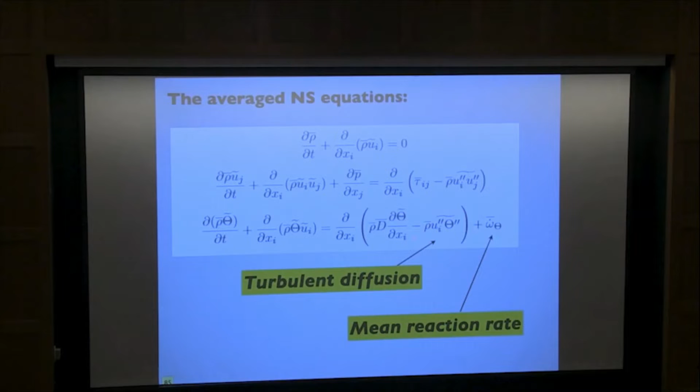I have shown you how to build a very, very bad model, but this is the only one we have for this diffusion term, where we replaced it by an expression which uses the gradient of the mean progress variable, so that we could replace this term directly in the equations. So this term that we don't know, we replace as a function of the gradient of theta.

Someone asked me if there was proof that this works. They actually proved that it does not work in many cases. This term, linking the flux to the gradient of theta, is one you might want to remember. We know there are cases where even the sign is wrong. That's what we call counter-gradient diffusion. When turbulence is not very intense, a model like this will produce a result with the wrong sign. We're not even talking about magnitude. The sign is wrong.

But still, everyone's using it. No one in the community, well, maybe 0.1% of the papers, tries to do something else. So we're all using this model. There are good reasons for that, but I don't want to go into the details right now. Let's say this is a Darwinian process, the only model used today. Now I want to talk about the second one.

The second one is an average needed for this quantity, the instantaneous reaction rate of a flame, and now we need to average it or filter it. You might think that shouldn't be too difficult, but this has kept us busy for a long, long time. Let me show you where the problem is. This is the expression of the reaction rate as a function of temperature, and it is very nonlinear. So when you want to average it, that will lead to problems.

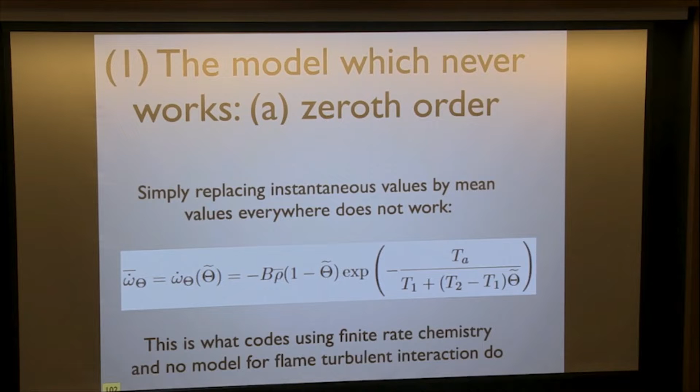This model doesn't work, and I want you to realize why. It's basically trying to ignore that we don't have the resolution in LES or RANS to capture a flame. A flame is typically 0.1 millimeter, while our mesh is at least 1 millimeter, maybe 0.5. So we are far, far from that. If you look at the field of averaged quantities, you have one cell at 0, one cell where you have the flame, so C might be 0.4, and one cell at 1. So obviously, if you try to apply an Arrhenius scheme on that, you will get 0, something, and 0.

You are not going to propagate any flame with that, okay? There's just no way. So we could use a model like that if we would not average, but not if we average.

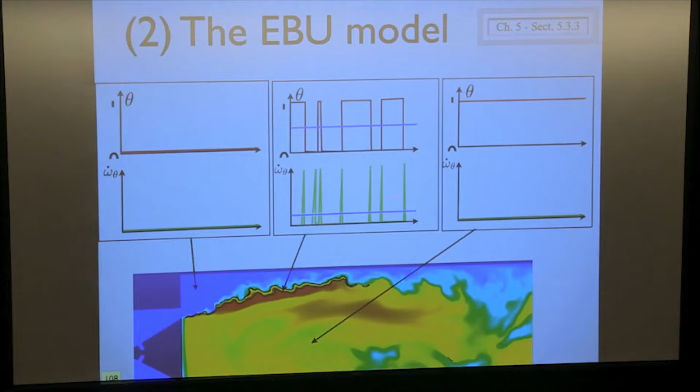So Spalding said, okay, let's build a model which takes that into account. For the moment, forget about chemistry - let's just count how many times a flamelet crosses a given location. So this is proportional to the variance of the temperature. Why is it proportional to the variance? Well, the variance is 0 if theta is constant, and if theta starts oscillating, the variance goes up. So it's a good model because it's at least not 0 where it shouldn't be.

And then it's exactly like the diffusion model. You say, okay, this is a term, I need to have the right dimensions, so I need a time here, and here I need a density, and here I need a constant - because I know that this constant is not going to be constant, but so I can tune it.

Now, the eddy breakup time, which is at the denominator, is the time of the turbulence. When you see that a flame passes in front of you, it's probably because it's carried by vortices. What is the typical time of these vortices? It's the only time you have - it's K over epsilon, K is the kinetic energy, epsilon the dissipation. So if you have a K-epsilon model, you have this quantity, so you put it here.

Now, unfortunately, you still don't have the variance of temperature. But again, you go back to the old guys - Bray, Moss, and Libby - and they tell you that if the flame is very thin, you can prove easily that the variance of temperature is just equal to the temperature multiplied by 1 minus the temperature.

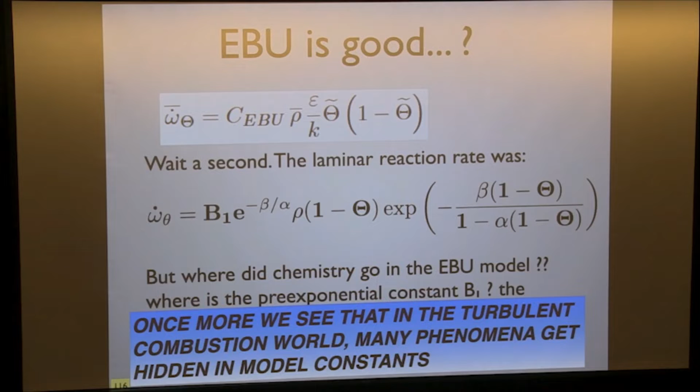If you know the answer, it's an easy model to use. If you don't know the answer, it's tough. So the Eddy breakup model contains everything which you had to throw away to be able to build a model which works. And again, I told you already, in the combustion world, you don't want to be a perfectionist, and you have many constants which are actually not constants, but that's the only way to make this thing go.

So at this point, I would like to open a small parenthesis on what we call the ultimate model. There is a model which would work all the time, and that's the PDF model - the probability density functions.

I just want to remind you of what this thing is by taking a simpler example that we can do right here in this class. We could take this person and ask him what's his size, and then we would put a +1 at his size. Then we'll take his neighbor, and we'll do that, and we can build a histogram of the sizes of the people in this room.

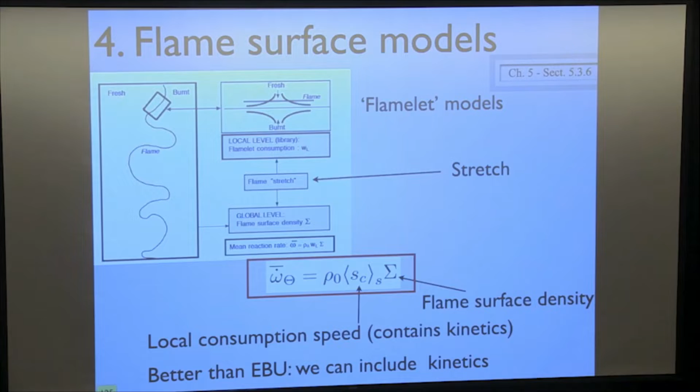It works only if you're in a flamelet zone. If we go back here to the diagrams of premixed combustion, the main problem is to find the consumption speed and to find the flame surface. Consumption speed, in many cases, we end up saying it is the laminar flame speed. I'll talk about hydrogen Friday. You will see there are exceptions. But for most fuels, when you average the consumption speed along the flame here, you find it's very close to what Darrieus and Landau said, close to the laminar flame speed.

So the main problem is to find the flame surface density. Because the flame surface density is created by turbulence, by a lot of things, and this is where things get difficult. And so there's been quite a few people who work on that. I think Pope, and we did also quite a few things on that.

Writing an equation for flame surface density is a pain. Let me show you how these things look—they are quite unpleasant. This is the equation for sigma. It has all kinds of terms. One of them you will recognize.

It's the stretch that we discussed yesterday, that Moshe discussed this morning. This is the source term of flame surface. If you stretch the flame, you create flame surface, by definition. But at the same time, you transport the flame surface to another place, and the flame moves itself and changes that.

And then, of course, you can have sink terms. You don't always create flame surface. Sometimes, if two flames meet each other, you make some flame surface disappear. So you need to model all that, and there's a long, long story of modeling.

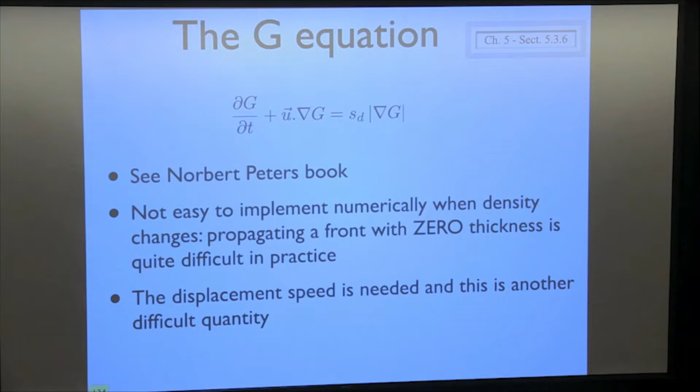Again, if you look at the history of turbulent combustion, there has been cycles. There was a cycle with PDFs, there was a cycle with the G equation. The reference here is Norbert Peters' book. But in practice, numerically, it's quite difficult to use.

Now, I mentioned yesterday the Thickened Flame model for laminar flames. It's probably one of the most used models today because it allows you to incorporate chemistry directly. So the way it's done: you start from this equation, which is the true equation, and you multiply diffusivity by F, and you divide the reaction rate by F. You can still keep 10 species or 20 species if you want.

The nice thing about it is that now the flame thickness is larger by a factor of F, and you can actually resolve the flame fronts much more easily. Instead of having 2 points in the flame zone, now you can have 20 or 40 or 100, depending on how much you can afford in terms of grid. If you are poor, you use a large value of F. If you get richer, you can decrease F and get more precise. But at least your code can work. And so this is why so many people use it at the moment.

Now, of course, there is a price to pay for that. It's clear that you cannot thicken the flame front and not lose something. If you propagate a flame which is 1 centimeter thick instead of 1 millimeter, something must happen somewhere. So you have to correct for that.

And the way you correct is that you have to introduce what we call an efficiency function, and we measure it usually by doing DNS. So here's an example of a flame which is not thickened, F equal 1, and the same here with F equal 5. You see that when F equal 5, there is much less surface, because it's difficult to wrinkle something which is big—the vortices cannot go into the flame, and you cannot curve something which is big here.

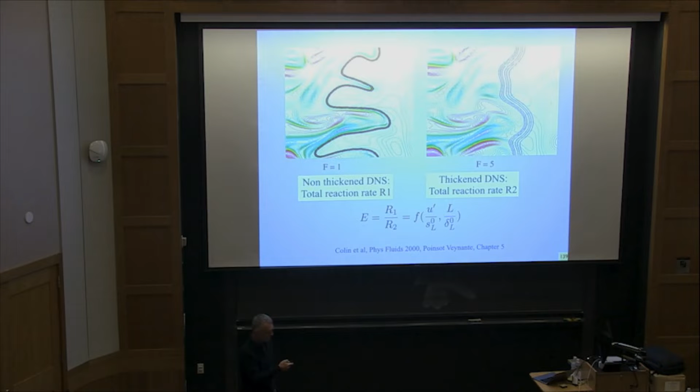So, for example, you see these points here have completely disappeared when you thicken the flame front. So what do you do? You measure the difference between the two here, and you multiply—in the initial equations, let me show you... did I write it down? No, it's not there. Let me go back here. You multiply here

the reaction rate by E so that you can make the flame faster. In other words, it has less surface, but you have sped it up so that it is actually burning at the same speed as the initial one.

And of course, E now becomes the place where you put all your modeling. This is what's done today by a very large number of people, one reason being that when you do that, you can still do complex chemistry if you want.

Let me finish with something I decided to talk about because I'm sure the question will come up, which is deep learning. At the moment, if you read Combustion and Flame, you will see deep learning everywhere. I just wanted to talk about that a little bit.

The world of mathematics has traditionally been split in two: models and data. Models means you look at a pendulum and try to write the Newton, or Navier-Stokes, equations to predict the frequency. Data means you look at 2,000 pendulums and make a table to recognize that for a given length, the frequency will be that much. In other words, when you do data, you don't try to understand the physics behind it, you just want to mimic it.

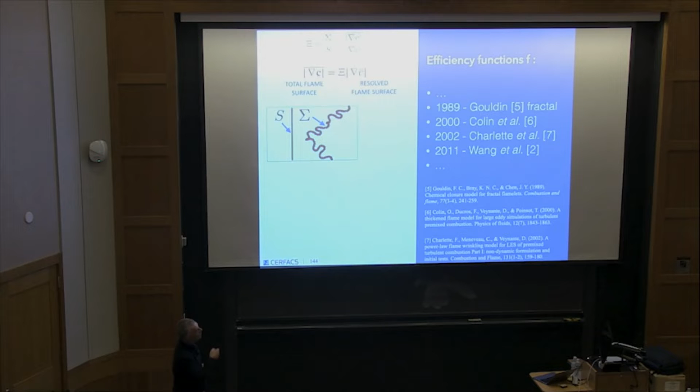If it's a flat flame, you will find 1. And if it's a corrugated flame, you will find the flame surface. So we'll talk about the surface, and we will measure the surface by the gradient of C. So the average of the gradient of C is the truth, and the gradient of C average is what the LES model will see. I just want to show you how you can do that using a CNN.

The role of the CNN is that I give it an LES grid and ask it, what is the subgrid scale wrinkling? Can you tell me? Of course, the CNN has no idea—you have to teach it how to do that. How do you do that?

Well, usually in fluid mechanics, you provide a DNS on which the CNN can learn what's going on. So here you see a typical DNS—this is the Bunsen burner. You inject turbulence, the flame front is here, and this DNS is very well resolved. On this DNS, we know everything.

So this is an example of the animation. You see the fresh gases, the burnt gases, and we can measure the flame surface here as much as we want.

So I'm going to show you how we train. This is the usual procedure with a CNN, okay? You have a training phase where you teach it what to do, then a testing phase where you verify it's doing what it should, and then you can apply it in another code.

So we have what we call the a priori test. Those are cases where you just test if the model does what it should on one snapshot, for example. And then we do a posteriori test, meaning you take your code, plug the model into it, and run a long simulation to see if it's doing what you expect.

I'm not going to give you the details of the CNN methodology, okay? It's not a school on AI. I just want you to understand how it works.

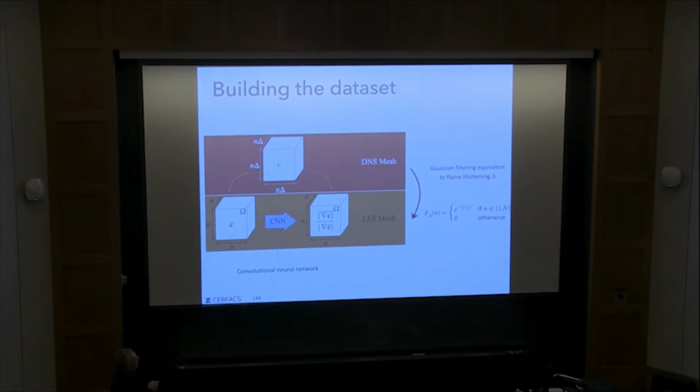Now the CNN must tell you how much wrinkling there is. To do that, you give it the true answer from the DNS, so that every time it sees this picture, it also sees this one. After a while, it must be able to predict that without seeing this. Once it's trained, once it has learned how much wrinkling there is, it should be able to give you the information right away. Well, right away takes a long time, huh? So let me show you how this works.

You have this training phase here, so we give the fully resolved DNS, and this is the average result. You see that this field has been averaged. So this is the field that will be resolved in our code, and this is the subgrid scale wrinkling.

The subgrid scale wrinkling is obtained from the DNS, because here, when we take a box, we can look inside and measure the flame surface, and we plot it here. So for example, you see that this point of high flame surface is this zone here, because there is a high surface.

And so we give millions of these snapshots to the CNN, literally millions, because we run the code many times, and every time it sees that, it learns, so that after a while it's able to give us the wrinkling from the mean field without seeing anything here, because it has already learned. So it knows if it sees a field like this with this type of shape, the wrinkling must be like that.

A very important thing about CNN, which is nice actually, is that when it does that, it doesn't look locally at the value of C like what we do in a model. In most models for turbulent combustion, we look only at one point. The CNN doesn't do that. It looks at the whole field in one shot. So it knows that to find the wrinkling here, it has to look at the whole field of C. Somehow it guesses the 3D shape.

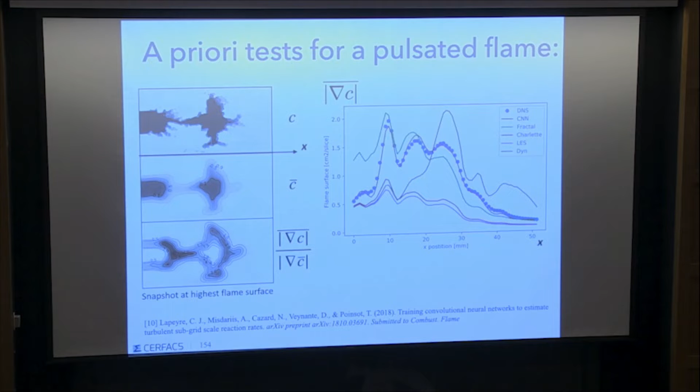And then you can also go one more way and say, okay, let's run now directly the CNN model in the code. Instead of running a turbulent combustion model, we can directly run the CNN.

Now just a word about that. If you want to use AI in a CFD code today, you better stop CFD and start computer science, because everything which is neural network lives on GPUs, and everything which is CFD, well not everything, most of it, lives on CPUs. If you want to run a CNN in your code, you need to couple GPUs and CPUs, which is what we did, but not me. It's a pain. You need to find a machine on which you constantly exchange information. You send the average temperature to the CNN, and the CNN sends you back the wrinkling. That's easy to say, but to make it efficient is really painful.

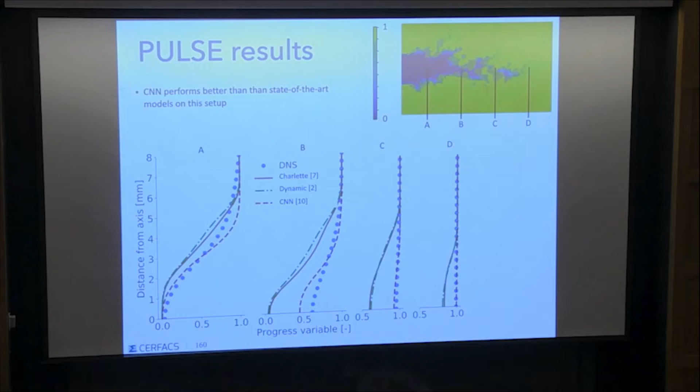So when you do that, you can do, for example, a flame like this one, where you pulsate the inlet. This is what the DNS gives, this is what the classical model gives, and this is what the CNN gives. And when you compare, we can actually prove that the CNN is doing better. When you look at the statistics, the CNN is doing better than the other models. So you might say, okay, great, so it works.

Actually, let me jump that. Actually it may work, but what happened after this talk - this was done a year ago - we used the same CNN on a completely different configuration, and it was completely way out. That's where we hit the main problem of neural networks: they are pretty good in the configuration where you teach them, and not pretty good when you change configuration, because they have learned something specific and have no way to extend it. They know how to interpolate, they don't know how to extrapolate.

And so the answer of the CNN guys at my lab was to say, oh well, you just have to learn on the new configuration. I say, okay, I have to learn on every configuration, so that's not a model. In other words, if you do DNS of every configuration, then you can do a turbulent combustion model. But if I have a DNS of everything, I don't need a model. So I think at the moment the big problem with CNN is that when you do it on one configuration, you are not sure it will work on another one.

Unlike theory, when you build a theory for a model, you know how it works, which is actually the other problem of CNN. Since we don't know how they work, they raise a big problem for industry, because if you want to certify anything using a CNN or AI in general, since you don't know how it works, you don't know if it can fail. So people are not so happy about that. I know you will find a lot of papers, a lot of contracts today on neural networks, but be careful, it is not that simple. It's a complicated story.

Let me see, yeah, we have time to start discussing the next topics, and maybe we'll come back for questions after this talk. Since many of you are actually doing CFD, and for the others who don't do CFD but would like to be able to criticize their colleagues, I'd like to spend now maybe half an hour or a little bit more on CFD specifically.

You know that one of the problems of CFD is that either you believe in it or you don't believe in it, but there are places where CFD has been used so badly that people don't even want to use it. For example, in France, you cannot predict the safety of industrial systems using CFD. They won't listen to you because they know it's not working, well, at least that's their conclusion.

At the same time, we see that more and more people expect much more from CFD. They expect CFD to predict the noise. They expect CFD to do ignition, quenching, instabilities, a lot of other things. So one of the problems we have now is not only do we need to do better models, but as you will see, we need to go to large eddy simulation, which means we need to change the code. Because it's not sufficient to put a model in a code to do LES. You need a good code to do that.

Okay, so I'm going to remind you why we want to do LES or DNS, then tell you what is needed in terms of physics, and then in terms of numerical methods. We talk only about turbulent codes, 3D turbulent simulations. I'm not talking about Cantera or Chemkin. Those things are easy. The main difficulty is to do something in 3D with turbulent flames.

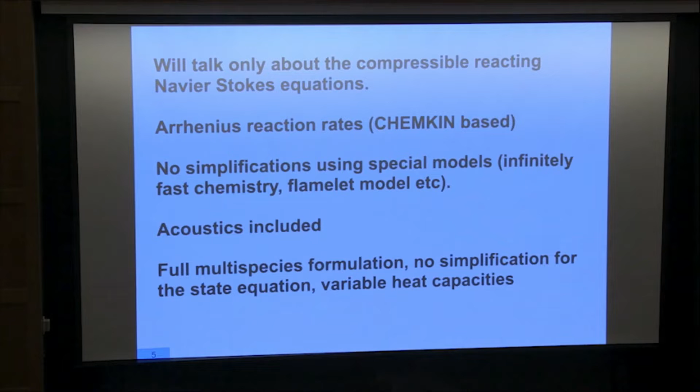We'll talk only about the full compressible equations, but everything I'm going to say could be used for simpler formulations, like low Mach number. So there will be acoustics, and I will need to talk a little bit about acoustics to get you ready for tomorrow. I don't know how many of you have studied acoustics. Who has already had a course on acoustics? Okay, not so bad. Sorry for the others, you will have to learn a little bit about acoustics.

So we have shown the equations. I just want to remind you that we're going to solve all these equations - energy, species. We have all the terms for that. And the main problem is that we need to do that in a turbulent flow, where we don't have enough points to do all that with precision.

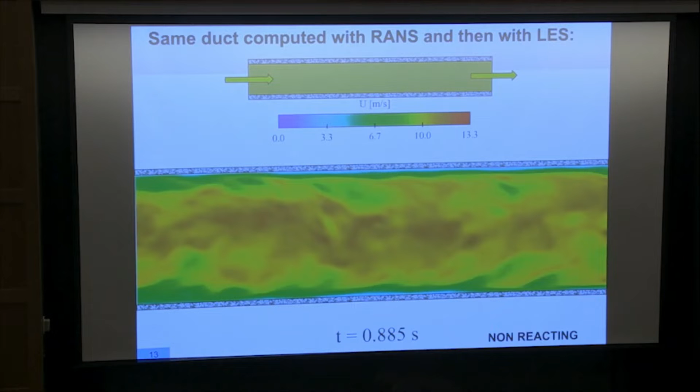The important thing when we move to this kind of simulation is that in terms of needs, it's really not the same. If you do RANS, this is the result of the RANS computation. You don't need a lot of points. Look at the gradients here - there is no gradient in this direction, so you don't need points. And in this direction, if you put maybe 20 points, you're good. So with 40 points in 2D, you could compute this flow.

So that's cheap, that's why it goes so well and so fast. But if you do LES, it's not the same now. You have to resolve the unsteady structures, which can be pretty small, and they can go in any direction. So you need to put a grid which is regular and small enough to capture all the details. And that's going to be already hundreds of thousands of points. So this is why the price is going to increase. And then, of course, you have to do it over time - it's going to be hundreds of thousands of iterations. So right away, you understand why the cost will be much more.

The other thing also which is not so nice about RANS is that RANS is actually hiding what's going on.

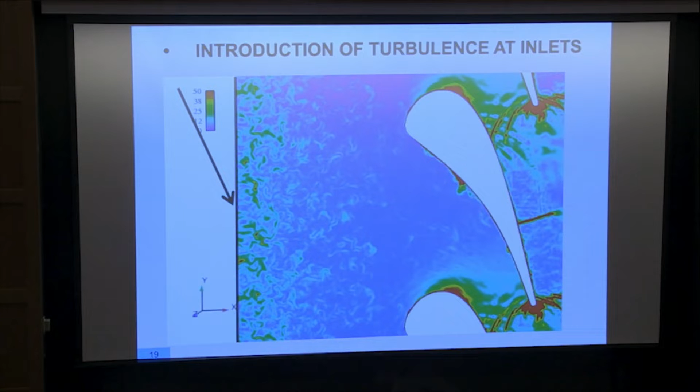For example, if you do a simulation of a blade with LES, you need to introduce turbulence at the inlet by resolving it. That means you need to create a turbulent field, which is a funny business that's going to use a lot of PhDs, actually. This is another example that makes very nice pictures.

We introduce turbulence here on the left, and you need methods to do that. Here we're looking at the vorticity, and the results will be completely controlled by the quality of the turbulence that you inject here. So you'd better do a good job injecting turbulence, which, by the way, leads you to the question of what is turbulence again, and that's a tough one.

So how do you do that? You need two things in a code to inject turbulence. You need to know the signals you want to inject, U, V, W as a function of time, okay? And those are imposed using a spectrum usually, a turbulent spectrum.

But then there's a numerical problem. You need to work on boundary conditions, and boundary conditions become complicated. Normally in a boundary condition you say U equal 10 meters per second. That's over now. Now you need to specify at each point an unsteady signal matching your turbulence conditions, and that's a big job.

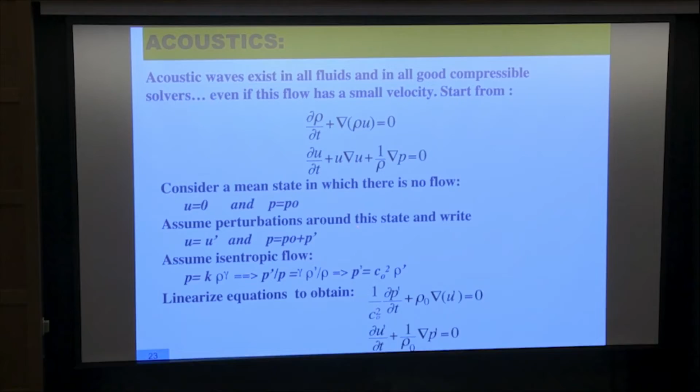If I suppose that P prime over P0 is small and U prime over the sound speed is small, I can plug that in here. I can also suppose, with good accuracy, that those perturbations are isentropic. Remember isentropy says that P is proportional to rho to the power gamma, which means P prime over P is gamma rho prime over rho. And this thing here, gamma P over rho, is nothing else than the sound speed squared, so the perturbation of pressure in this room will be connected to a perturbation of density with the sound speed squared in the middle.

So you plug that into this equation and you find what we call the linearized Euler equations, which are the baseline equations to do acoustics. These equations show you how to compute the propagation of a pressure perturbation or a velocity perturbation, exactly like those equations drive the propagation of sound here in this room when I'm talking.

So you can combine these two equations to obtain what we call the famous wave equation, and I've written this wave equation here in 1D. You see it's the second derivative of P prime versus T, versus second derivative versus X, with 1 over C squared in front of it. This equation has a very simple solution - well, two solutions actually. One solution is a wave traveling right.

So when I'm talking to you, sound's going that way. But there's also the same thing when traveling left, just by having U prime and P prime in a ratio of rho C with a minus, you go left. If you put P prime equal rho C U prime with a plus, you go right.

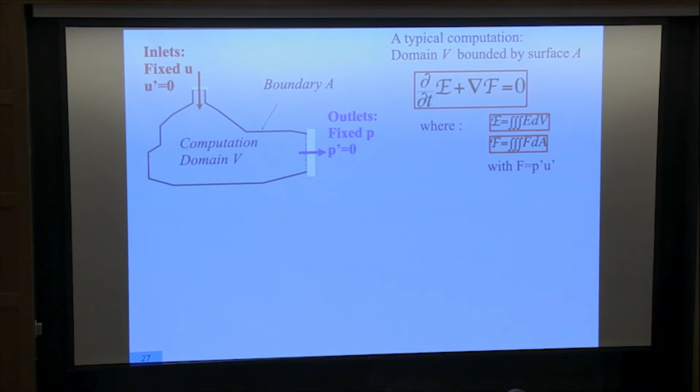Since the fluxes are 0, it means the first term here must be 0. So dE/dt is 0, E is constant. So the acoustic energy which is in your box can never go away. So I've just demonstrated that in a compressible code you can never converge, because with these boundary conditions, the acoustic energy present at the initial time will keep bouncing all over the place so that you will never reach steady state.

And you will tell me that in Fluent that's not the case. We'll explain in a few minutes why.

In a code there are two things I've neglected. One is the viscous dissipation in my demonstration. If I had kept viscosity, I would have had a small term here, mu multiplied by some term. But in an LES code or in a RANS code, you get much more problematic terms: the turbulent viscosity and the artificial viscosity. These terms would kill the acoustic energy and bring the code to convergence, but for the wrong reason.

And in an LES code, we don't want to do that. We want to keep the acoustic energy where it should be.

In other words, in the real world the energy is dissipated because there is a flux. How do we know there is a flux in a combustion chamber? Just because if you're sitting outside, you can hear it. Obviously, if there were no flux, you wouldn't hear anything. So that means when we say U prime equals 0 or P prime equals 0, this is not sufficient. We need to do better than that.

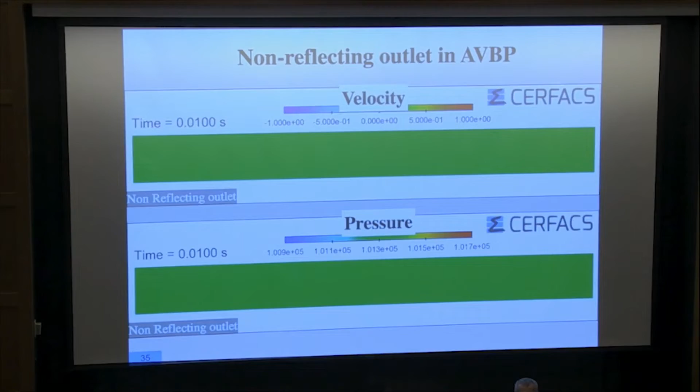No one really cares. Write papers on the methods which allowed you to get the results, because those papers are cited, they're useful for readers. When you write a big paper saying 'I did this wonderful computation,' people say, yeah, why do I care? But if you tell them how to do the same thing, they are more interested. That's a key element if you want to do LES. You need these boundary conditions.

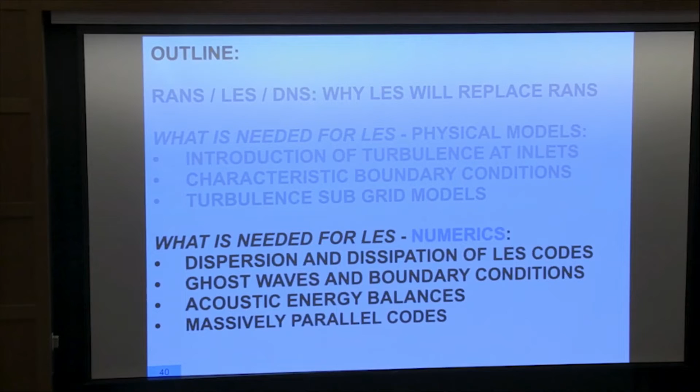I suspect many of you have already followed a course on numerical methods, so I'll try to keep it short, but there are a few things you really need to understand if you want to do CFD and LES, and also if you want to understand what the limits are when you look at the results of your colleagues and they tell you, I've computed it, so it's right. I guess in many cases, I've computed it, so it's not right.

So to do that, I need to start discussing the numerical methods and to talk about waves. It's another field probably that not all of you have touched yet, but you've seen acoustics, which are actually waves. But you have other waves in fluid mechanics. You can have entropy waves if you have a hot spot propagating in a flow, a zone of high temperature. You can have vorticity waves.

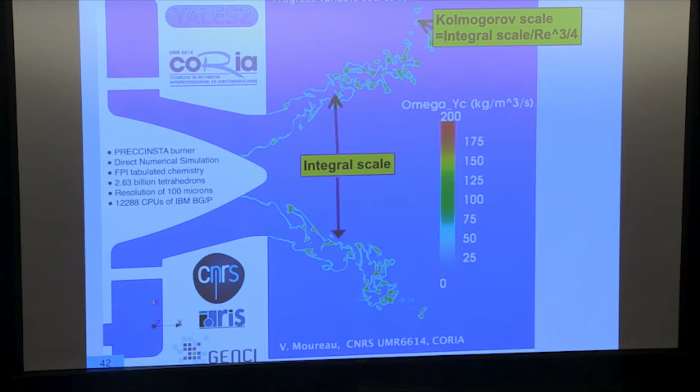And so you need more and more points. And the number of points increases like Reynolds to the 3/4 to the power 3, because you get 3 directions. So it's like Reynolds to 2 point something. So when you go from Reynolds equal 1,000 to 5,000, it's not a detail, even so you don't see it.

So really, the problem when we do simulations, and when you talk to your PhD colleague telling you, I'm doing all this wonderful LES of my chambers, what is your Reynolds number? If the Reynolds number is high, then probably you're not doing what you should.

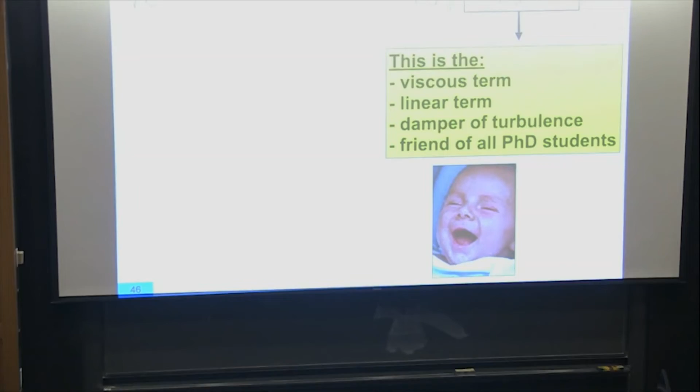Some of you may not be used to the Navier-Stokes equation, you're just coding them, but you have to get into them to understand what's going on. That's the momentum equation. This term here is your friend. It's the viscous term. It's the term which prevents eddies from becoming too small, because if viscosity is large, when you have a big vortex, it will go away. This term is useful for us because it's also a linear term. If you multiply the velocities by 2, you multiply this term by 2.

Great. Now, the problem is that this term has to fight the guy on the other side here. This guy is not your friend. Why not? Because it's a product. Forget rho for the moment. There's a product here, ui, uj, which is a nonlinear term. I don't know how many people here have studied chaos, but you know that linear equations don't do anything to you. But if you take any equation like y prime equals 2y squared minus y cubed, this thing can get crazy because it leads to chaos.

Chaos leads to turbulence, and so in this equation, you have to understand that turbulence comes from this guy. If this term would not be there, you would not have to care about turbulence. Everything would be linear, like people solving the heat equation, dT/dt equals alpha Laplacian of T. That's great, no turbulence, okay? But for the flow, this guy hates you. And the way it works is that this guy creates the turbulence, and this guy dissipates it.

And the ratio between the two is the Reynolds number. So when the Reynolds number is large, you have a lot of people who are not really friendly, and just one guy trying to help you by dissipating the energy. And so this is a tough fight. So how do you handle that in practice?

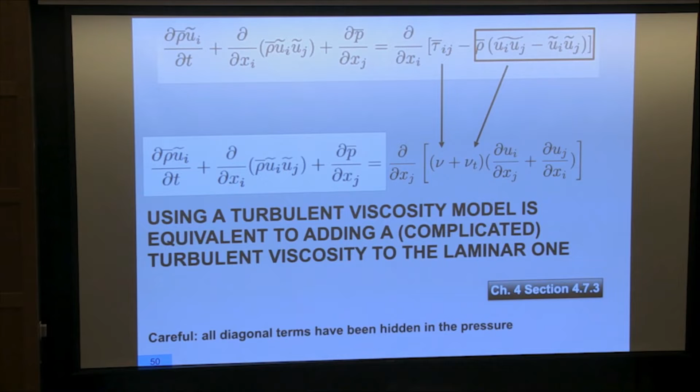The other solution is, if you look at basic courses on numerical methods, you know that if you're trying to solve this equation, which is really the baseline equation for waves—an equation where you propagate a signal f at speed u—if you discretize it this way, with a centered derivative, this thing blows up right away. It's unstable. If you remember your courses, this thing is unconditionally unstable. And so the way people fix this problem is that they add a second order term on the right-hand side of the equation, which is fi+1 plus fi-1 minus 2fi, divided by delta x squared, and that fixes the problem. If you take a nu here that's not too big, you're able to make this equation stable.

Except that, of course, you're not solving this equation anymore, you're solving that one, because this expression here is just a discretization of that one. And so now we have added another viscosity—in addition to the turbulent viscosity, we have added an artificial viscosity to our problem.

Now, by the way, many of you are using codes where people say they are not using artificial viscosity because they have upwind schemes. Upwind schemes are a way to stabilize schemes where, instead of Fi plus 1, you put Fi minus 1 when U is positive, and that fixes the problem. But again, if you do the Taylor analysis of that, you find out that you have just added a second order term.

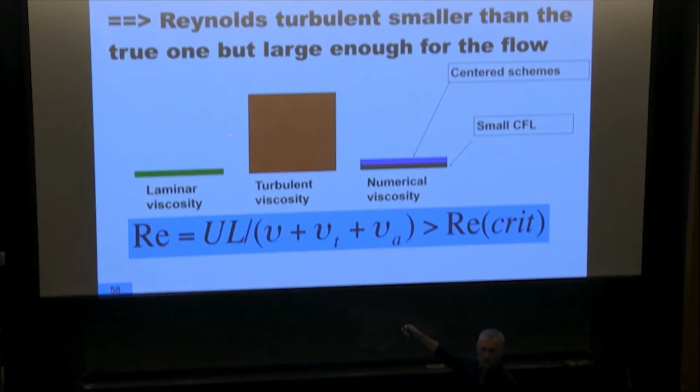To do something in between, we want to diminish the turbulent viscosity by using subgrid scale models such as Smagorinsky, so we have less viscosity so that the flow can be turbulent at least. The trick is that when you decrease this, the numerical scheme's dissipation should also be decreased, otherwise you have a problem. A good LES code should not use upwind schemes and should use a small time step so that the Reynolds number stays as large as possible.

This is where things get difficult. For example, Fluent and many other codes, Converge, all these guys, they've done the same thing: they took their code and just replaced the K-epsilon model with a Smagorinsky model, but didn't change the numerics. So when you run these codes for LES, the subgrid model doesn't play any role. Everything is controlled by the numerical terms, so when you change the grid, you get a different result. The way to check is: if you run those codes, you can go into the code and set nu_t to 0, and you'll find the same result, because it doesn't play a role. Everything is in the numerical terms.

So again, one of you asked me if I believed in CFD. I believe in good CFD, okay? But not that — this is controlled completely by artificial viscosity.

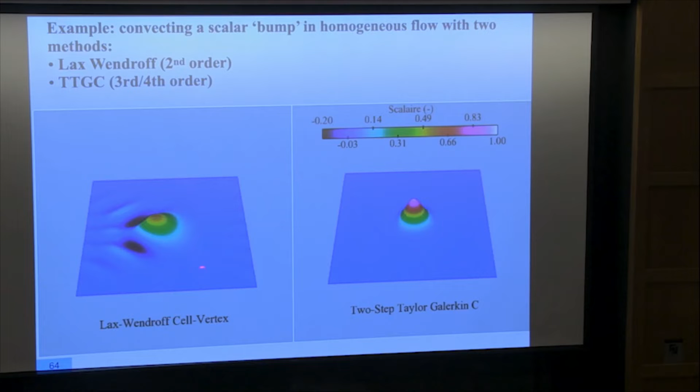There's another reason why you want to do this. This is a species, okay? The nice thing about dispersion is that it can create strange behaviors, like those zones here that are negative. Dispersion does that. When you start from a signal like this, and if the scheme is dispersive, you start having wiggles, and the wiggles can become negative. Negative for a species is a little bit of a problem, okay?

If you have a chemical scheme, imagine if you say the concentration of O2 is minus something, the chemical scheme will not like it. So this will lead to problems, which sometimes people eliminate by saying yk equals max of yk and 0. That's called clipping. If it's negative, I put it to 0, but that does not conserve mass, and you don't want to do that.

I'm not going to give you a long list of all the possibilities, because there are things you can do to understand that just by hand. Again, theory - not theory of combustion, theory of numerical methods. You can study the properties of schemes without having to write a code, just by looking at this equation.

So this is the propagation at sound speed c of a signal u. It could also be propagation of temperature at the convection velocity. It's the same. So it's just to show you how a scheme like this reacts when you change the time advancement scheme and the space advancement scheme. We're going to do that with the simplest scheme to derive in space, which is ui plus 1 minus ui minus 1 divided by 2 delta x.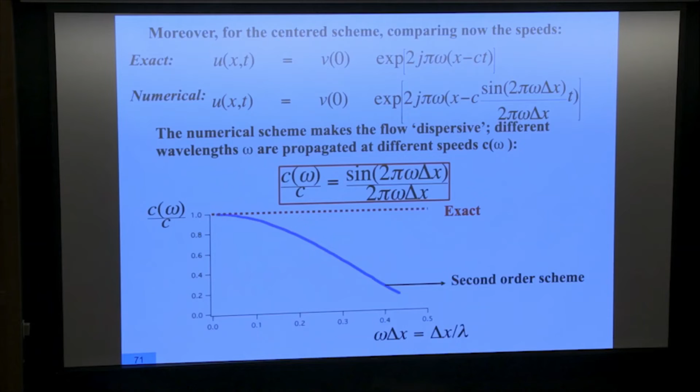So now you see that the speed at which my code will propagate the signal compared to the true speed is given by this expression. You can plot it as a function of 1 over omega delta x, which is also the wavelength divided by delta x, which is nothing else than the number of points you can afford to put in your vortex or in your acoustic wave.

You see here, for example, if you put 10 points in this vortex, you will have an error of maybe 5%, which is already big. But if you are poor and have only 4 points in your vortex, you have an error of 40%. So if you're doing LES of combustion in a chamber and your vortex propagates with an error of 40%, you might as well not bother, because it's going to be wrong.

So all the frequencies will be wrong. I mean, it won't work. So we need to improve on that. And how do you do that?

Well, it's been known in the DNS community for a long time that when you go to high order, it's much better. I've seen someone yesterday using the 6th order scheme that we developed at CTR a long time ago. A 6th order scheme is much more precise. A spectral method would almost be on the exact line. So you definitely need high order schemes if you want to do this job.

So let me show you what that gives if you write a code. This is a MATLAB code, and you try to propagate one of these signals. So I've decided to take this shape, and I'm going to advance it in time. I just want you to look at the results.

So the cyan color is the exact solution, and the black is the numerical solution. Normally, they should match at all times. The system is periodic, so when the wave comes here, it will come back on the other side. So look at what's happening.

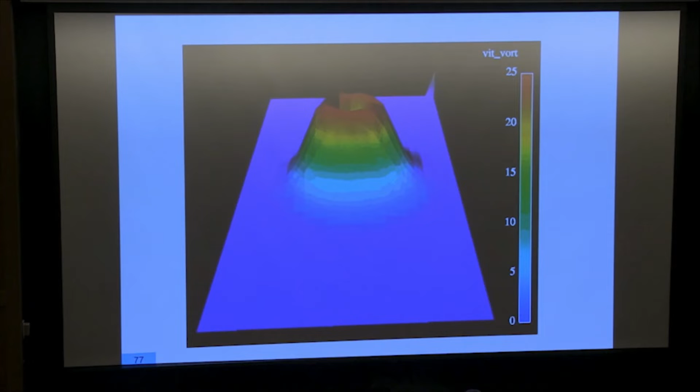So here now you have a vortex in a periodic box. The vortex comes out and comes back. It's non-viscous, so the vortex should come back exactly the way it left. This is a view of the vorticity - you see the vortex leaving, coming back. We can make it turn 1 time, 2 times, 10 times, and it should remain the same. Again, no dissipation - we don't want this thing to go away.

I'm going to show you results obtained with - actually we did it with CFX, we did it with Fluent, we did it with our code, 2nd order, and then we did it with a 3rd order scheme. I just want you to look at the results for the moment. For the moment, we're going to do it also with a small CFL number.

That means a small time step, if you want. If you want to repeat those tests, you can go to this e-learning website at CERFACS, and there's a long list of descriptions for this test case with a comparison between different codes. And if you do that, you can also send us the results, and we'll put them on this list so that you can compare.

So this is a view of pressure. Why do we plot pressure? In the center of a vortex, you get a negative pressure - a smaller pressure. This is the exact solution. And you see that after 3 turnover times, we should be here, but the 2nd order codes are here. That means they are dissipative and they are dispersive - they go too slowly and they lose too much energy.

If you put the 3rd order scheme on the same scale, it's right on the solution. So you see there is a huge difference between the 2nd order code and the 3rd order code for a case like this. And if you go to 10 turnover times, this is what you find with 2nd order codes.

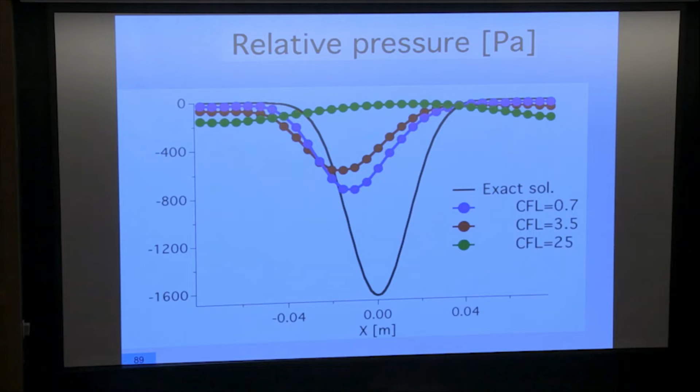So there's no way, you cannot do LES with these things. Maybe someone someday is going to find an implicit scheme which works for LES, but today, if you look at the existing schemes, they are all explicit. Just again, not for fun — they are explicit because this is needed for precision.

Now I want to finish here this part with a fun one, talking about wiggles. We have seen that we need to propagate physical waves and that this is difficult. What I want to show you now is that when we write these codes, we have the physical waves, but unfortunately we also have other things which we call Q waves.

The reference book here in this domain is Vichnevetsky and Bowles. It's what we call the small black book. It's very easy to read. If you do a PhD on numerical methods, please read this one. It's extremely good. And of course, there's the famous book by Tapan Sengupta, who is in India, who also wrote a big book on the same topic.

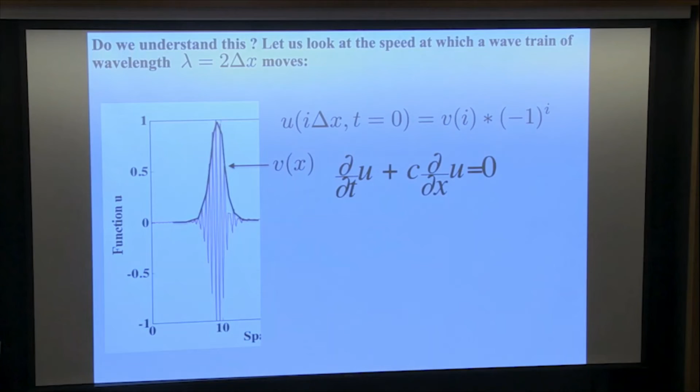First thing I did is you go in the code and you said, I coded it wrong, there's a sign which is wrong. But no, actually, this is expected, and you can prove it. It has a wavelength here, what I call 2 delta x, meaning the signal goes from plus to minus, etc., and it's propagating in the wrong direction. You talk to someone like Sengupta, he will laugh at you and say, of course, that's obvious. So I just put here the demo so you see it's actually easy to understand.

We're trying to solve this equation. Suppose the signal we impose at t equals 0 has an envelope v of x, the black line. Since it's oscillating from point to point, you multiply it by -1 to the power i—that's the shape of the initial curve. You plug that into the equation with a centered scheme, and du/dt becomes this, discretized this way. You simplify, and you end up with dv/dt minus c dv/dx equals 0. So in 2 lines, you can prove the envelope will travel in the wrong direction at speed c. There's nothing magical here.

As soon as you have wiggles on your signals, they will propagate in the wrong direction, and that's not something you can accept. You can generalize that by computing the group velocity of any wave trains, and the general formula is coded here. This analysis shows that the world in simulation is split in two parts. Here's the number of points you can afford to put in a vortex. If you put more than 4 points in each vortex, it may not propagate at the right speed, but it will at least propagate in the right direction.

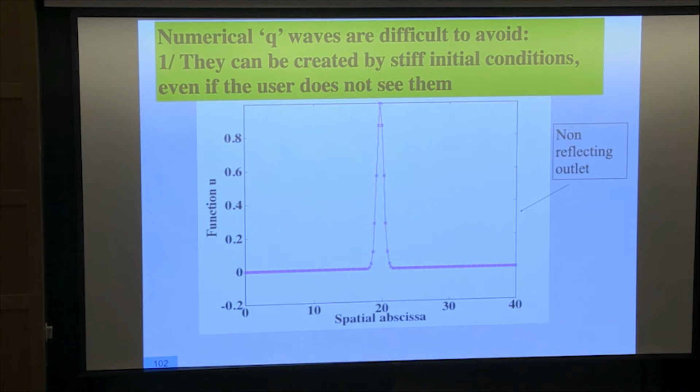Now, the way these waves are reflected on the boundaries depends on their frequency. I want to show you two fun movies. This is a case where you have enough points, and this signal is going to touch the boundary. You see that when it touches the boundary, it creates a little bit of oscillation here, but not too bad.

But if you don't have enough points, and that's always the problem with LES—we don't have enough points to put in the mesh—then you see that it's going to shake much more. This is a higher frequency, so less resolution, and you see now this signal propagating to the left.

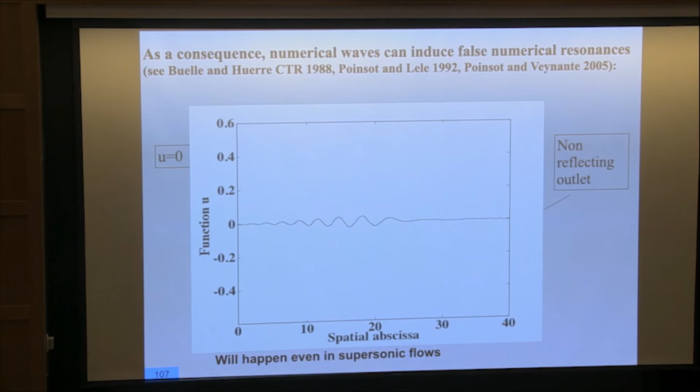As a result, that's a paper we did also a long time ago. You have a mechanism by which a wave hits the outlet, generating a wave which comes back, hitting the inlet, which generates another wave, and this can keep going, and your computation is completely polluted by these waves.

Now, to control these waves, there are things you can do. Of course, these waves are plus-minus oscillations, so if you put artificial viscosity, you're going to kill them. That's why you never see them in front—because they are dissipated. But we don't want to do that.

We don't want dissipation, so we have to use better schemes. We have to be careful with this. You should never clip. What you do in practice, in most good CFD codes for LES, when you see those wiggles appear, you just hit them locally with some artificial viscosity. In other words, there's a guard in the house—every time he sees a ghost, you hit him, only him, locally.

And normally that should be enough to clean the problem. In practice, when you use codes with limited dissipation, it's quite likely you will see those waves. If you don't see them, it's probably that you have too much dissipation. But you have to get used to it. A lot of students tell me, 'I've never seen that'—well, there are good reasons why you wouldn't see that in many codes.

This is an example of the code we typically use. If you start from this initial condition, after a while this is what you obtain—you have wiggles, but you also have a signal. If you use a dissipative code, after one turnover time, no problem, there is no wiggle, because there is no signal left.

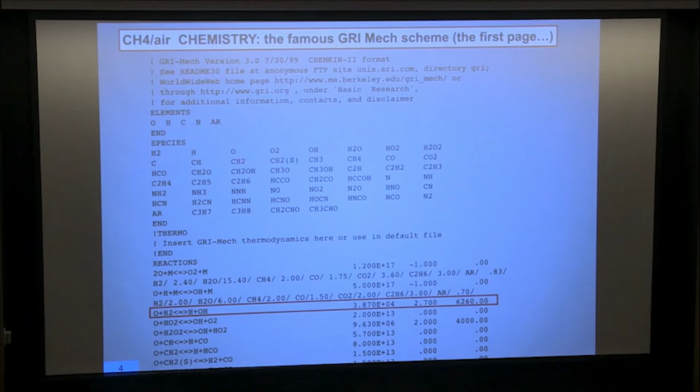So what do we do with this? We know these schemes, but in practice we cannot use them in 3D codes. So the main challenge today is how do we fit those schemes into a big CFD code? Now forget about the chemist—you're just doing computing science, writing the code. You know that every additional species is an additional conservation equation, more memory, more work. How many can you really use? Well, it's going to be a problem.

You know, if you add more species, you need more memory. If you add more reactions, it's more CPU time.

I'm going to list 4 methods to do that: what I call the brute force, in which you just take the scheme and plug it into your code, whatever the cost is—it's difficult. I will talk about tabulation, reduced schemes, and analytically reduced schemes, which are recent methods, probably the future, I believe, today. I will not discuss the G equation, and I will not discuss methods like the flame surface density models, because there is no chemistry really there. I will stick to cases where we want to do some combustion.

Remember, we call elementary reaction a chemical reaction which really happens, and we call global reaction a global reaction which does not happen—it's a concatenation of many elementary reactions. Someone like Alison will only talk about elementary reactions, but in a code, quite often, we use this notion of global reaction to simplify the problem.

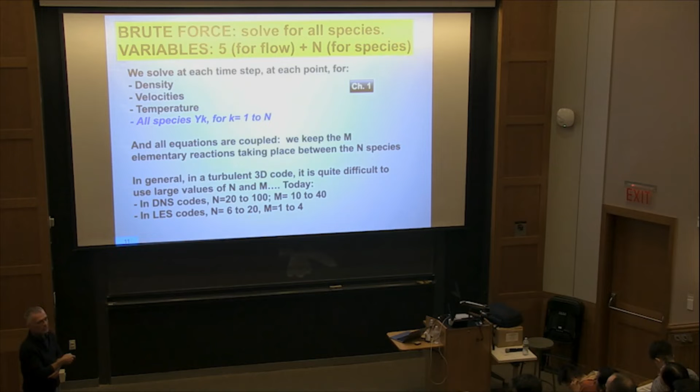Well, in practice, we do that in DNS codes if there are less than 20 to maybe 100 species—even 100 becomes difficult—and usually we do that in 2D. In LES codes, we never go to more than 20 to 30 species, and not too many reactions, because the work then becomes too big. There is no assumption if you do that, but in practice you will find it only for a few flames, normally hydrogen, because you can do it. But in most cases, it's too difficult.

Now, remember also, that's a question you shouldn't ask to kinetics experts. If you have 10,000 reactions, for each reaction you have 3 constants, so you have 30,000 constants to specify. Then you ask Alison, how many of those do you really know? And she will tell you, if she's honest, 5%. And where did you find the remaining 95%? Well, we guessed them more or less.

I'm not joking, but it's almost a joke. They do a lot of comparison with other molecules. Oh, it looks like this one, it should be like this one. And of course, after that, they do tuning for years, and they know what they should use. But this is again only a model.

And remember, you have heard this morning Moshe and me yesterday—how do you validate these models ultimately when you do a flame? You do it on spherical flames. And if you listen carefully, you know that the accuracy of spherical flame measurements for the speed is quite unclear. So you don't want to be too perfectionist about those schemes, because even the full schemes are only models at the end of the day.

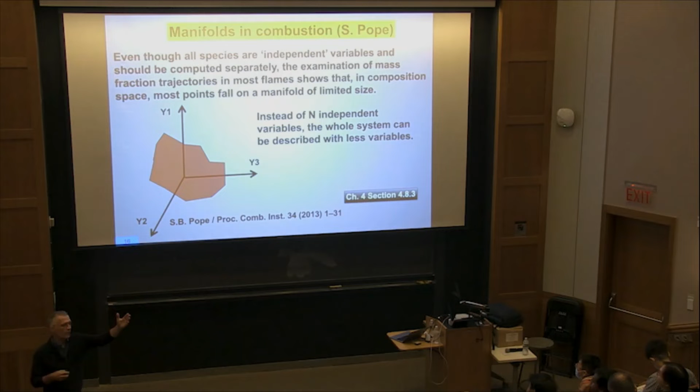Tabulation is a method based on—well, I guess Steve Pope is a good reference here—saying that in combustion, all the species are not independent. You know, obviously, for example, in the flame of methane, if methane is going down, then probably CO2 is going up. You don't have to consider them as independent variables. And probably, if you plot the trajectory of the species, you will find out that many of them lie on what we call a manifold, which is a surface of lower dimension than the full scheme you would expect.

So, for example, in a turbulent premixed flame, certainly you will not find points where you have a lot of fuel and a lot of products. Okay? Because if you don't have fuel, then you have products, and vice versa.

So it's not reasonable to keep all of that. You can probably keep only something much smaller. Most of the action will take place where there's a lot of fuel and no products, and when there's a lot of products, there's less fuel. So we can describe this system with fewer variables, which simplifies our task from a CPU and memory point of view.

Now, the manifold may look strange. That's an example of a manifold obtained by Matthias here at Stanford, where you have N2, CO2, and CO, and you see that most of the points in the DNS lie on a surface which does not cover the whole space. It covers a much smaller space.

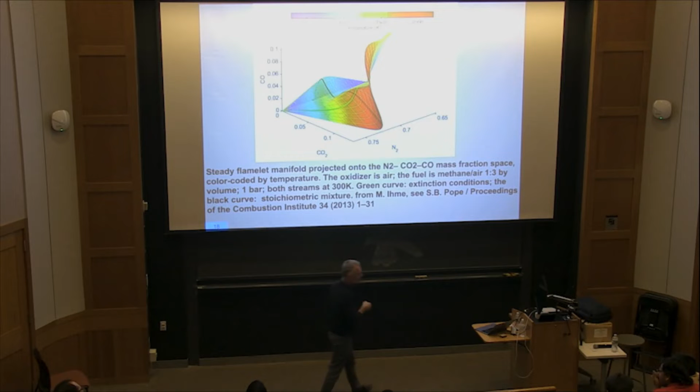So the idea is that you should be able to keep our 5 usual variables for Navier-Stokes, and instead of n independent chemical species, you would like to keep maybe 1 or 2 variables, and then all the others can be related to these 2. That's the principle of tabulation.

Usually most people, not all, but most people use the progress variable C and the mixture fraction Z as the two important variables, and they say everything else can be connected somehow to these 2 variables.

It means also that if you run your code, you will run it with only C and Z, and after doing the post-processing, you can obtain all the other species, because they're supposed to be a function of C and Z. So it makes your life much easier when you run your code—you only have 7 variables, the 5 here plus C and Z.

Now, as I said, normally people use C and Z, but the definition of C and Z can become difficult. Sometimes defining what the progress variable is becomes an issue. Most people would use something based on the sum of CO and CO2 in hydrocarbon flames and normalize it that way, but if the flow is not perfectly premixed, then things get more complicated.

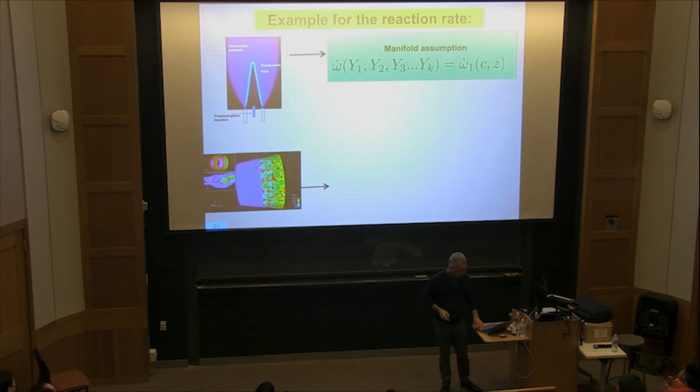I just want to show you how this would work. The main idea would be the following: we would say that the reaction rate in the flame, which depends on everything here—actually the temperature is missing—is a function of C and Z only, okay?

And then there's a second level of assumption, that this is true also in a big turbulent flow. And there's an additional assumption, which is that the manifold for the laminar flame is the same as the manifold for the turbulent flame, which is also not so clear.

And so the way it would work is the following. You would take a laminar premixed flame, for example. You would measure the link between omega dot and F of C and Z by doing multiple flames at different mixture fractions and different levels of C. You put that in a table, and when you go to 3D, you read C and Z in your DNS or LES, and you just use that as the reaction rate.

So you see there's a lot of assumptions, but the nice thing at the end is that you can use it easily in a big 3D code. It's not clear that this works, okay? And there's been the topic of many papers.

For example, can you use a manifold written for a diffusion flame in the case of a premixed flame? Can you do the other way? Can you use partially premixed flames, etc.? And does turbulence change that? Everyone says no, turbulence doesn't change that—it's the same manifold for laminar flames and turbulent flames. Otherwise, we would be dead.

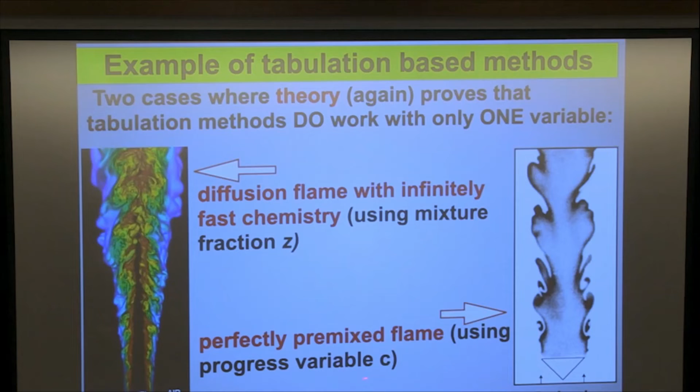So I just want to show you two examples where manifolds obviously must work, you see where theory is so important again. The first one is the diffusion flame using infinitely fast chemistry, or something close to that. And the second one is the perfectly premixed flame, which we did yesterday.

If you suppose that chemistry is very fast, we have shown yesterday that everything must lie on the equilibrium lines. So the equilibrium lines in an infinitely fast chemistry are a manifold. If you can assume that the chemistry is infinitely fast, it will work.

Of course, there's a lot of ifs here, okay? The flow must be adiabatic, chemistry must be infinitely fast, you must have only 2 inlets, not 3—that would be a problem. Then you can directly use a manifold which has only one variable—everything is a function of Z. Easy. So in that case, you would be stupid to solve for all the species, okay?

It would be a waste of time; just go straight for the tabulated approach. So your code will look like this: your 5 variables plus mixture fraction. As soon as you get mixture fraction, you go here and read Y fuel, Y O, and temperature.

That's a case where tabulation obviously works. Now, it would depend on the flame you compute. A flame like this one, which is lifted, shows no combustion here and combustion starting here. This is the reaction rate, this is the stoichiometric line. This tabulation method would work here, but not at the bottom, because there we are on the mixing lines, not the equilibrium lines, so that won't work. You have to be careful, but it's still a method used by a lot of people.

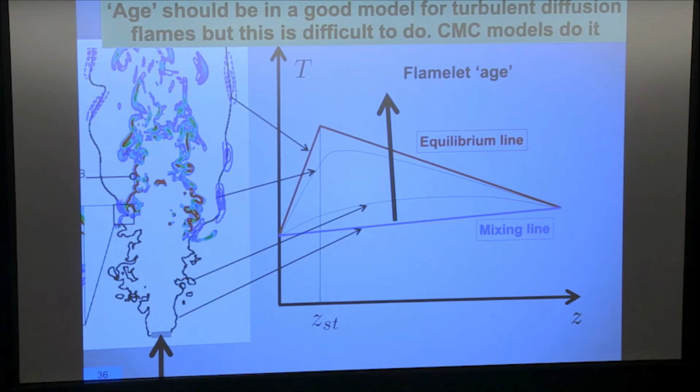You would like to go from the mixing line to something higher, to the equilibrium line. This is more or less what you do in CMC models, which I did not describe this morning, an evolution of PDF models. But again, things get complicated.

The other case where tabulation obviously works is perfectly premixed flames, which we also did yesterday. If you suppose the flame is very lean, you can say this is equal to 1, and track only the fuel mass fraction. We showed yesterday that the fuel mass fraction depends on temperature, so you can use only temperature - that's exactly the definition of tabulation. The formula for the reaction rate depends only on temperature, which is by definition what you want in a manifold.

So you can also use a tabulated method for a perfectly premixed adiabatic flame - this is, for example, what was done here. The simplest manifold in this case is written here: you read the fuel mass fraction and deduce the temperature by requiring you to be on this line, where Y plus theta equals unity. All points must be on this line. The gas entering is at the bottom here, and the gases leaving the chamber are at the top.

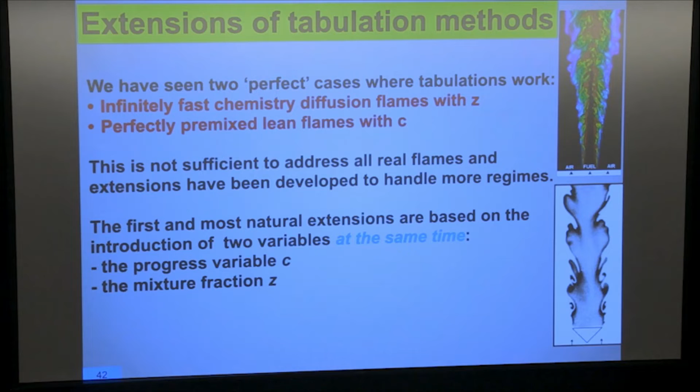I don't want to talk too much about extensions because there are many. The thing to remember is that extensions require increasing the size of the table, and there are cases where the table actually takes more space than the CFD code itself - probably not the best thing to do. You want to stick to two variables; C and Z is probably the most reasonable choice.

The nice thing is that you somehow have complex chemistry when you do that, but it's frozen complex chemistry - the one that's tabulated. You cannot change it. So let me show you the success of that. There are many groups doing this, many of them actually in this room, I guess.

People have used that for many applications, but there are also limitations. I want to talk about the limitations in a second. But first, numerically it may be useful to use tabulation because in the tabulation you tabulate only physical results.

In other words, when I give you C, you give me an omega dot which is physical. It was tabulated in a laminar flame. While in many codes, if you compute this directly, if you have any errors, like I've shown you, fuel mass fraction or oxidizer mass fraction would become negative. If they become negative, the reaction rate will be crazy. That will not happen with tabulation. Tabulation forces the solution to remain within a certain interval, and that's of course quite favorable.

Okay, so numerically there are advantages to tabulation. And of course, after you have finished your computation, you can post-process it for nothing, and you can get NOx, CO, whatever, all the species. Since they have been tabulated, you can obtain them afterwards.

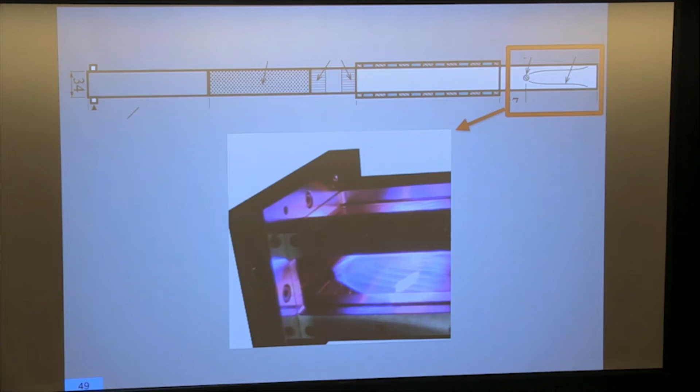That's a premixed flame stabilized on a cylinder. A very simple flame. So those are premixed gases arriving here on the cylinder. You can see the cylinder here. The flame is here, it's a premixed flame. And the thing about this is that the cylinder itself can be cooled by water or not. So depending on what's happening, here this is almost adiabatic, and here it is cooled.

And you will see, of course, that if it is adiabatic on the right-hand side, then you can compute it with a manifold for adiabatic flames. But if you're on the left side, you can't.

Nice movies, huh? I like this one.

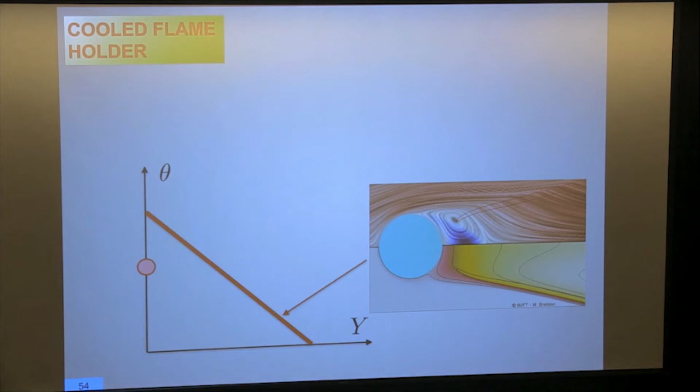So the important thing is that when we do the adiabatic case, we are definitely on the manifold. That means the fresh gases which come here are here, and the burnt gases which leave here are on this point. But when you go to the cooled flame holder, because you have heat losses here, these gases are those gases but cooled. So they are not on the manifold anymore, so you cannot use a tabulation anymore because you will arrive here. So as soon as the flow is non-adiabatic, you have to change that. Then people doing tabulation will tell you, okay, we can do a tabulation with heat losses. So that's one more dimension, and then things get difficult to evaluate.

Okay, let me jump now to reduced schemes. If you don't like tabulations, there's another game you can play, which is to use only global reactions that do what you want. So typically here we have our 5 variables, and we'll use a few global reactions, typically not more than 4 or 5, with maybe up to 10 species.

And all these species now will be independent. So we'll be able to take into account heat losses. We'll be able to take into account a lot of things. The question is, how do we build these global schemes?

Now, this is a game which has been played here for a long time, especially here at Princeton. I mean, you look at the old papers of Westbrook and Dryer. They've tried that for a long time. Many people have tried that. They've tried to build up a scheme which would have only, you know, 2, 3, 4 reactions and which would capture most of what's important.

It is an interesting exercise because you can play with the pre-exponential constant of each reaction, with the activation energy, with the temperature exponents, with everything. I think Moshe mentioned that this morning too. Those are the schemes where you end up with a chemical reaction which can have negative exponents. You can have something like a pre-exponential constant, YCH4 to the power minus 0.3, which is a problem when YCH4 goes to 0.

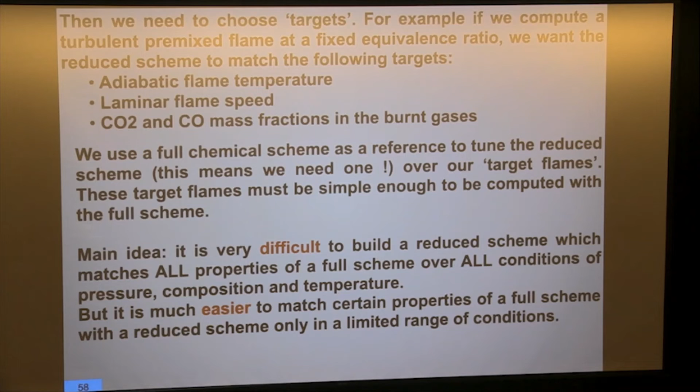Why does it work, actually? As you will see, it works really well. And the reason it works quite well is because when you do that, you don't try to fit a scheme to do all composition, pressure, and temperature. You just try to tell it: OK, I'm doing a chamber at 10 bar, 300K, please build me a scheme which does just that.

And the way you do that is you need a full scheme, okay. You need Cantera, obviously, with a full scheme for your fuel. And then you have your reduced scheme that you can run on your laptop, and you tune it until you can compute the target flames and match them by fitting things, as I said, automatically or by hand. Then once it's done, you can use your reduced scheme in a 3D code like we did for tabulation.

Again, it works really well because you are not very ambitious. You don't try to find a scheme for CH4 which does all conditions. You just try to find a scheme which can do the case that you want. So let me give an example.

Here we're going to do methane. And as you see, methane, here we do with only one reaction. That's not much, okay? It's difficult to do less. So you take one reaction, you write it like this, and then after you tune the result, here's what you obtain. Let me go back.

That's the adiabatic flame temperature as a function of equivalence ratio. So you see that the blue line here is the reduced scheme. And you see that, of course, compared to full chemistry, you are bad here. But if you're computing a case at 0.8, you're pretty good. Why would you introduce 20 more species to do something which has no interest for you?

If you're doing a premixed flame here, you see that all this range is really well captured with that. It will be a waste of time. It will be also a waste of points. All the time that you're losing by doing a full scheme, you could use it to do better resolution.

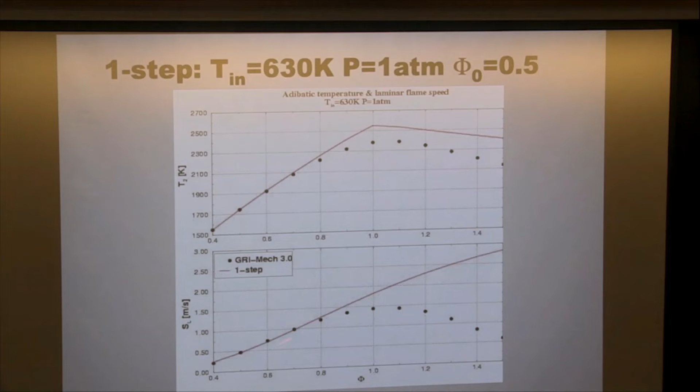And then when you look at the flame speed, you see also that the flame speed is extremely good here. Of course, it's not good for rich cases, okay, but if you are doing a lean flame, why do more? Now, I remind you also that anyway, the precision of the full scheme is not that big, okay? All these points here are distributed. So you see that the reduced scheme here, which is extremely cheap, is very good for the flame speed until maybe 1 or something. At least it is clearly within the range of the margin of errors of the full scheme.

So we should not worry too much about it. It's probably sufficient. Now, you can do better. The first thing you do when you do one-step chemistry is that you go usually to two-step. That means you add the CO-CO2 equilibrium.

Why do you do that? Well, because the fact that temperature is too high here comes from the fact that you don't have CO. As soon as you add CO, this relation here in your scheme, the temperature goes from here to there, and you see that you are right on the exact solution. So just by adding CO, you can be very good for the flame temperature, and you see that you are pretty good also for SL up to equivalence ratio of 1 or something, and that doesn't really cost more.

You're computing CO also in the burnt gases. O2, CH4, whatever, you see that the agreement is really good. And again, remember that this is 20 times less expensive than running GRI-Mech, for example. So again, if you want to do a full 3D computation, please don't use GRI-Mech. If it is fully premixed, use a two-step scheme.

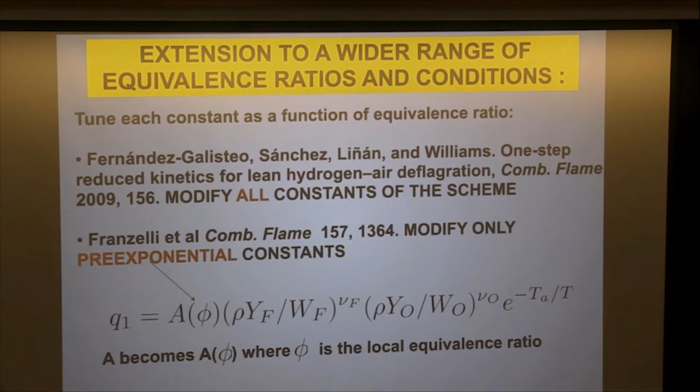I think there's a pretty good paper by the Spanish group. We did it too, by tuning just one thing: the pre-exponential constant, allowing it to change as a function of the equivalence ratio. When you do that, you get one of the most famous schemes in the field, the BFER scheme for methane. A lot of people use it because, as you can see, it is very good over a wide range of equivalence ratios, just because we've tabulated the pre-exponential constant. The results for flame speed are much better than what you need.

So a lot of people doing methane computation actually use this scheme because it's the best compromise in terms of precision versus cost. Of course, you can try to use GRI-Mech if you want, but I'll be waiting for you until you get the results, because the cost is going to be 20 times more.

Now I want to finish by talking about analytical schemes. These schemes have been developed in the last 10 years, and they're interesting because they want to mimic the global schemes, but in a smart way, let's say from a mathematician's perspective. Let me tell you the principle of that.

The scheme I've shown you before is built in a way so that we don't use at all the information we have from full schemes. We just try to mimic them. But you can do better than that. You can actually take the full schemes and go from the full scheme to a reduced scheme by using mathematical methods developed by theoreticians and people like Ed Law. And it works. It didn't work in the old days, but today it works quite well.

So instead of having only 2 steps, maybe we'll allow ourselves to go to 10 or 20, and instead of 6 species, we go to 25, but all of this will come from the full chemistry, not from some ad hoc method to try to tune things.

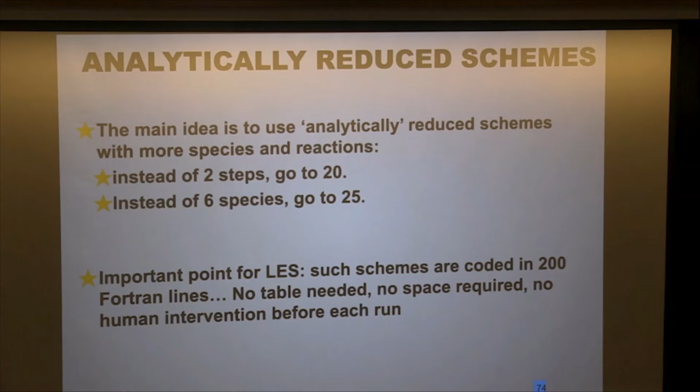And for you, when you look at your CFD code, it doesn't make a difference, okay? It's 200 lines in the CFD code, so it will still be reasonably cheap compared to a full scheme. These methods are not new.

If you read all these papers, somehow you find Ed Law somewhere. That's one of his papers, when he did it 15 years ago with Tianfeng Lu, and they already proposed this method. So let me describe roughly the principle of the method.

You start from a mechanism, which is a crazy mechanism, hundreds of species, thousands of reactions. You give it to this code, and the code looks at species and reactions and starts eliminating those which are not important. Sounds easy to say, okay? Mathematically, it's difficult. And you end up with what you call a skeletal mechanism. The skeletal mechanism is supposed to have the main important information and not the details of the scheme.

But now this is usually still too big to go into a CFD code, so you do one more thing. You go to a setup where you start eliminating things, for example reactions which are in quasi-steady state. You eliminate them, you replace them. Everything is done automatically. And at the end, you come out with typically 20 species.

So I'm going to show you what that gives for methane, because again, methane is really the first gas you'd want to do. You start from GRI-Mech, so this is a monster, okay? You cannot do that in a CFD code in 3D. It's crazy. So you use this method, you come up with an ARC scheme, and you can directly plug it into your code.

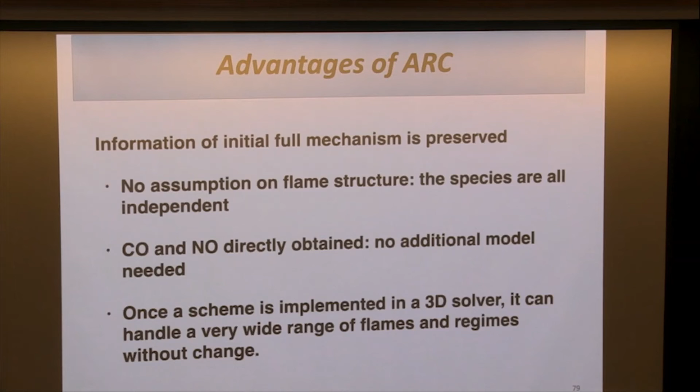This scheme, then you can test it on a few flames. In this scheme, you're going to transport 22 species. It's not small, but it's still reasonable. You will have what we call quasi-steady-state species, which are not explicitly tracked, but you can always obtain from the previous ones because there are algebraic expressions from those.

So that's working. The nice thing is that it works really well at 300K and 1 bar, but then you go to 700K and 3 bars and 6 bars, and it works as well. That's what's new. Why does it work? Because it keeps all the intrinsic qualities of the initial full scheme. It still knows that it is a full scheme initially, so you can do a non-premixed flame here, and it's still working extremely well.

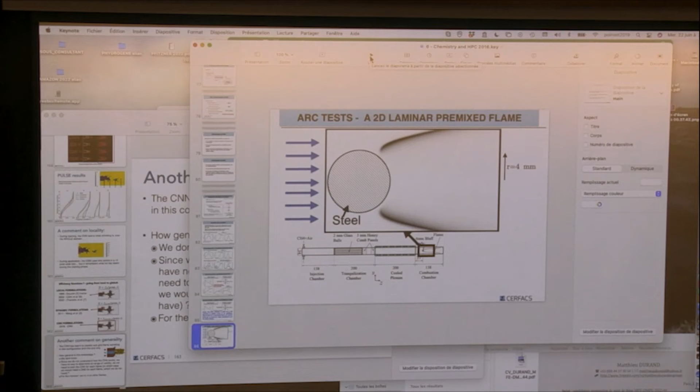What is the price? The price of a computation is proportional to the number of species. So you start from, we had 5 plus 6 when we do a reduced scheme, that's about 11. Here we have 5 plus 20, that's 25. So the price is about 25 divided by 11, it's 2.5. You don't lose anything, it's much better in terms of accuracy if you use the ARC scheme, but you need to pay 2.5 times more. The accuracy in terms of chemistry is better, of course. And of course, you're losing human time because you need to code all that, you still need to make your code compatible with this thing.

I think there are cases where, when you go to piston engines, for example, the capacity of meshing easily with Converge overwhelms the other arguments. We've been doing piston engine computation with unstructured grids for a long time, and they were just too long in terms of human time to generate the mesh. But there are other cases where it's not the case. For gas turbines, Converge is probably not as good as what we do.

But the problem is that when you're sitting on one processor, you don't know the other processors. So you need to gather all the information from the whole mesh, do the min, and then resend the information. On one processor, you'd just do a loop, do i equal 1 to n. But on a parallel machine, you don't have the data on the same processor. So that looks like a simple process to do.

Usually in certain codes you have what we call a master, and the master will ask the slaves - each slave has a little bit of the domain - what is the time step. So first you get all this data from the other processors, gather them, and once you've determined the time step, you send it back to each processor. Looks like a very simple thing to do.

There are methodologies to do that. MPI typically allows you to receive a message and to send a message. So on paper, it's easy.

The problem is when we did that in our code on 10 processors, 100 processors, 1,000 cores, it worked really well. Then suddenly at 10,000 we found out that this process was actually the biggest process of the whole thing - the Navier-Stokes resolution was faster. Why? Because we had this problem of communication.

That's the main problem when you have 100,000 processors. If one of them has to do something in common, all the others are waiting, saying okay, when you want, I'm ready, send me the time step. And the poor master has to process everything - everyone is waiting for him.

And so there's a simple fix to that. Initially, what the master was doing was sending the time step to every slave. But then you can do something better. You can say, okay, I'm the master, I'm sending the time step. Now instead of sleeping here, you can wake up and send the time step to the guy behind you.

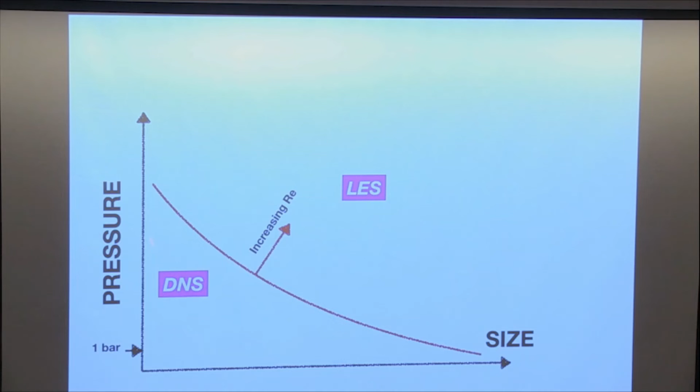I want to show you this in a diagram where we plot the Reynolds number as a function of pressure and size. If this is the size of the system you want to compute, and this is the pressure, when you do a PhD, usually you're looking at a small chamber at 1 bar, so you are here. You may think you are good because you get results matching the experiment. But unfortunately, when you go to industry, the real gas turbines are at 20, 40 bars. And we'll talk tomorrow about hydrogen and larger domains, for example, when you do explosions you have to do a 50 meter domain.

So there the problem is that we may be good here and extremely bad here, and so we will not be able to do DNS everywhere. We might be able to do DNS here if it's not too big, but not at the top level. So we will keep having to work on models and turbulent combustion models, even if DNS might replace everything one day, but I don't believe that.

Okay, we finished with an introduction to a fun topic which we touched on already since we started talking about acoustics, and that's combustion instabilities. So that's an example of combustion instabilities in an annular system, you can hear the noise, and we'll come back to that in a minute. We'll talk about acoustics today. Acoustics can be not only noisy but also jumping because of combustion instabilities, so we need to talk about that, because many of you, even in LES or in experiments, will hit on combustion instabilities, and it's good that you know what to expect.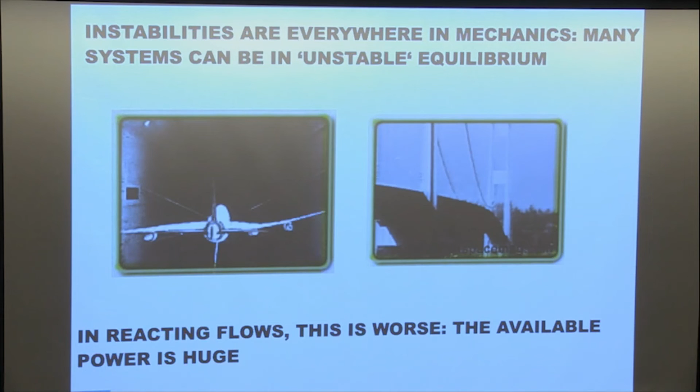So I just want to remind you that instabilities are found everywhere in mechanics. The way you design systems in mechanics is that you show an equilibrium state, and then the question is: is it stable or not? You know that this is stable and this is not so stable, and sometimes you find out a little bit too late that it was unstable.

Like the famous Tacoma Bridge, probably you've heard about it. This is without combustion, but if you add combustion, because of the huge power which is there, these things can become extremely unpleasant, extremely fast.

So in combustion, you have multiple instabilities. You have to be careful about the word instabilities. For example, when you inject liquid fuel into a chamber, that's the instabilities of the interface which create the droplets. That's one type of instability. If you look at kinetics, Moshe will show you thermodiffusive instabilities tomorrow, when you see cells forming, and that's another type of instability.

Of course, you also have instabilities when the combustor gets coupled. That's the case for rockets, for example, with the tank, and then you start having oscillations. That's also an instability. We have classified them in the combustion world as a function of size, basically. Intrinsic instabilities are instabilities appearing on the flame front, typically. Chamber instabilities are instabilities linked to the whole combustion chamber. And system instabilities are instabilities which involve the whole aircraft or the whole system, okay? So the size goes up.

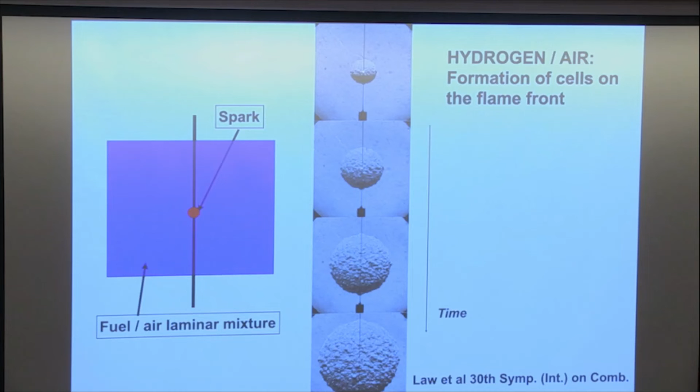Now, just a word about intrinsic instabilities. You've seen them already. Normally, a flame is smooth, but if you go to low Lewis number, you start developing cells. That's a type of instability, but it doesn't hurt anyone, so I don't want to talk about that one. You've seen these pictures already, there was one by Moshe this morning. It's a classic in the combustion community. That's also actually a simulation. You can have these things also in simulation when you form these instabilities, and we'll talk about them when we talk about hydrogen.

Let me go to the other side now. The system instabilities, the most famous one is what we call the pogo effect, which is more or less controlled today, where there was a resonance between the tank, the structure, and the engine, which basically blew up the whole satellite. But again, this is not the problem I want to discuss today.

So to understand combustion instabilities, you need to understand that flames and noise, flames and acoustics if you want, are connected. They live in the same world. And normally, they don't interact too much. For example, you have a flame here, which makes noise. Well, the noise goes away, okay? And the only interaction between the two is that you generate noise, and then the noise goes away. Fine, it's a problem in itself. When you do acoustics, you have to care about it, but it's not the main problem.

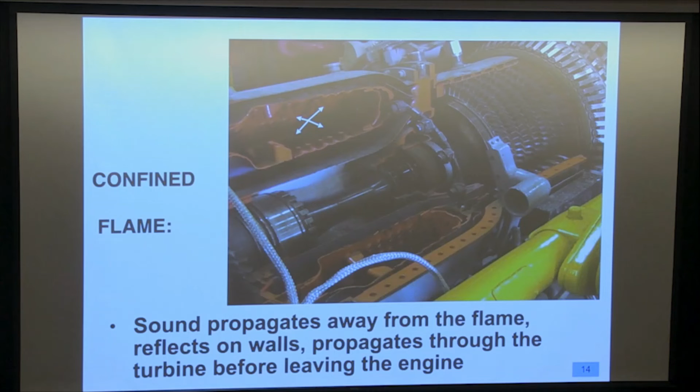Okay, so here I need to mention a few things about fluid mechanics and instability theories. There are two types of instabilities in fluid mechanics in general, the convective and the absolute. So what's the difference? The convective instabilities, if you plot them as a function of time and x, if you make a perturbation here, like you go in a river, you throw something in the river, you will see waves, but these waves will be convected away. So if you come back here after a certain time, you will see that the wave you introduced has been pushed away in the river. It's going away. So if you wait long enough, everything will be gone. If you throw something in the river, after one hour, nothing will be left.

Fine. The resonator is not working that way. The resonator is something where you throw something in the river, and then the whole thing starts oscillating, okay?

The classical example, you have a rocket engine, you push it, and then this thing starts vibrating and exploding. That's bad. So that's what we want to avoid, the resonators.

There's a big theory on that by Monkewitz and Huerre from USC, and I don't need to go into that. The only thing I want to mention is that somehow you feel that to have a resonator, you must have some kind of feedback mechanism. You throw something in the river, and somehow the information comes back to feed again another perturbation. So you need some kind of negative velocity to have a resonator.

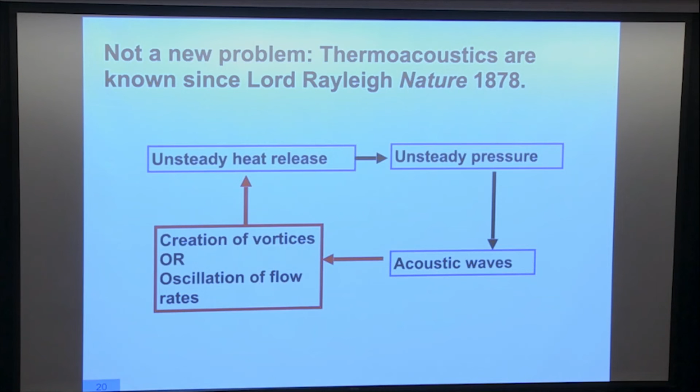These instabilities are, of course, dangerous. I've shown you many examples where when these things start building up, they can generate vibrations, they can quench the flame, they can make the system explode. I mean, there are lots of examples. And interestingly, we've known them for a long, long time. The first papers on combustion instabilities is Rayleigh, 1878. And he already indicated everything which we're going to discuss today. So this guy was smart.

So why do we have instabilities? First thing to remember is that flames make noise. I didn't show that yet, but you can prove it. It's quite easy, actually. You read these papers here, it's 2 lines. You can prove that the pressure anywhere near a flame is proportional to the variation of heat release. So if you take a steady flame, there is no variation of heat release, there is no noise. If you take a flame which is moving, there will be a dq/dt, so there will be a pressure. And they are related by this very simple formula.

You can actually even hear it. This is, I had a student doing a CFD PhD, so he wanted to do experiments, so he did that at home. So that's just an example of a tube. Here first without flame, and actually the noise is so low that you don't even hear it, so you just have jet noise here.

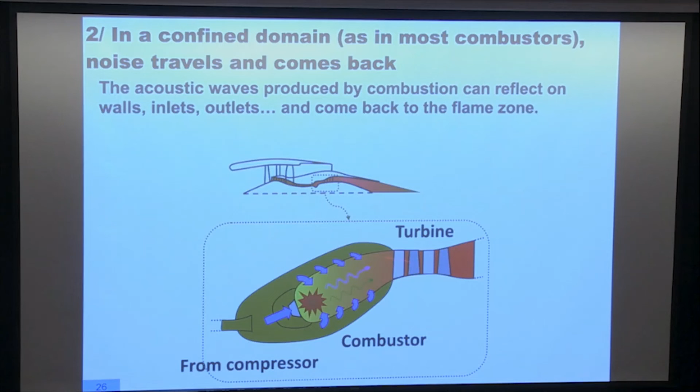Now this property can be illustrated also if you have a Colombian PhD student like mine. We had this experiment in Toulouse. This is a case where you have 7 flames, and he had a loudspeaker at the bottom of it. So he used to send harmonic waves, but from time to time he would do something else, like this one here: this time for Africa.

Samina, mina, waka, waka, samina, mina, sakalewa.

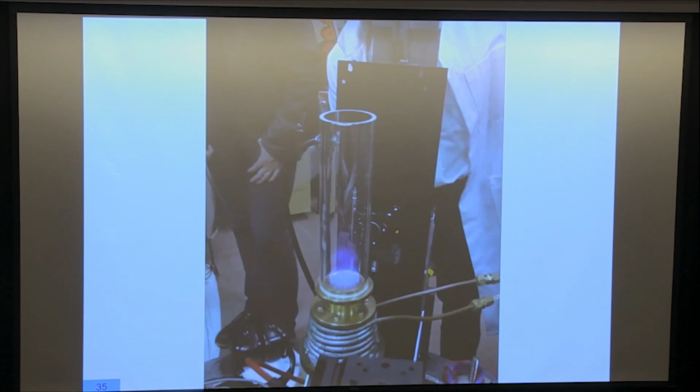So I think I have another fun example, because these things take all kinds of shapes, like this one. Different frequency here, you see the flames jumping. If you want to do an experiment here, you are stuck with instabilities, okay? Another one. I have a long list.

So you see, these instabilities are not exceptional events. You hit them quite often. Not all companies have the problem, but many of them have the problem.

So just a first element here of giving dimensions. You see that if these things are associated to acoustics, they must scale with the acoustic timescales. So what is the acoustic timescale? You see typically here, if you look at the time it takes for an acoustic wave to propagate from the bottom to the top and come back, it's about 2 times L over C. And if you look at the sound speed with the numbers we have, it's about 700 hertz. That's what we will see in most chambers. Most chambers are of the order of 50 centimeters. And so the combustion instabilities will be between 100 and 2000 hertz, something like this.

So when you will hear a very sharp noise in a chamber at this type of frequency, you might be able to guess that you probably have a problem of combustion instabilities. Now, I don't want to describe swirl again because we did that already. Swirl participates to this problem, okay? Because swirl is a nice thing to stabilize flame. I already showed you this type of picture.

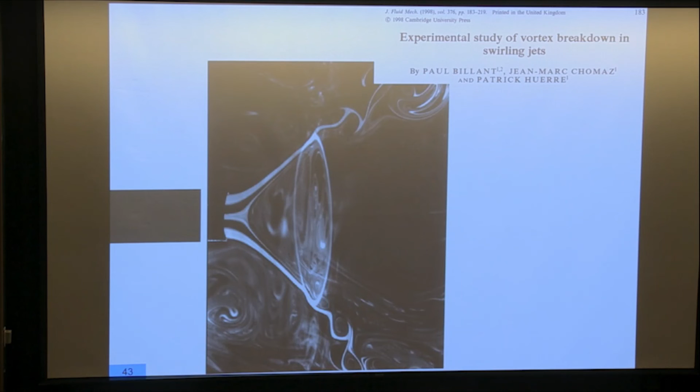You know that when you add swirl in a chamber, it creates a huge recirculation zone, and at very high swirl, this is helpful to stabilize the flame. But unfortunately, swirl also leads to instabilities. A swirl flow has this capacity of developing instabilities, which are a problem.

You've actually seen swirl flows before, because this is what you have in the contrails of aircraft. The problem about this rotation is that everything that turns can become unstable.

This was actually a theorem that the French probably know about, but you don't. There's a famous French mathematician, not from my family, whose name is on the Eiffel Tower, so I can say I have my name on the Eiffel Tower, but it's not me. He was the one talking about precession. Precession is the fact that if something is turning, the axis of rotation pretty soon starts turning as well.

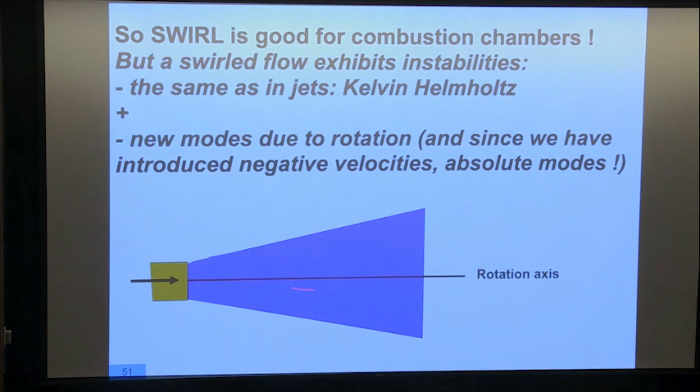That's okay, except for swirling flows, where it has bad consequences. In a combustor, the axis of rotation of the swirl also starts to turn, and that generates problems. In the air, the first instability you see is in the contrails you'll watch tonight. They usually don't stay straight, they connect to each other and do all kinds of funny things, because they're quite sensitive to instabilities. In a turbulent flow in a combustor, the axis of rotation also starts turning, giving us this helix formation, which is not good for combustion instability.

In swirled chambers, we have both acoustic waves and these structures in the center of the chamber. Again, in the community at the moment, there are hundreds of papers trying to elucidate the links between the two.

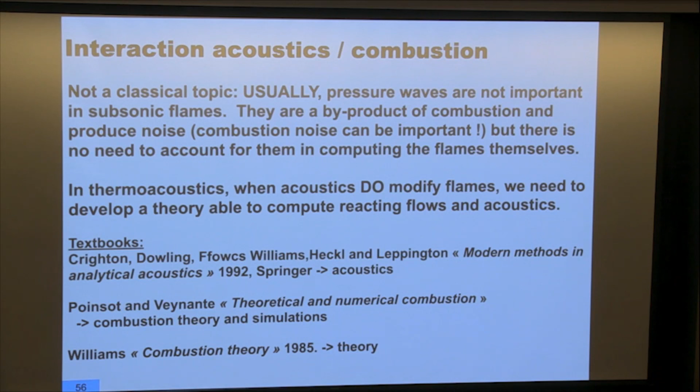As I said, this topic is not a classical one. If you need to work on it, I guess the good places to start are this classic book by Crighton et al. There's a lot also in my book, and Williams has a pretty good description of that as well.

So now, after you know the phenomenology, to show you how to use the tools that you have today, I want to illustrate that by talking about the two methods that we use to do that.

The one method to understand instabilities would be to linearize the equations and look for the eigenmode. This is exactly what Moshe has been doing this morning, except we're talking about a 3D reacting flow, so it's not that easy to do, and I'm not going to do it today.

The other way, and you will recognize it in a few minutes, is to define an energy of the system and see if this energy is growing or not. And if it's growing, we can find a criterion for instability. That's what I want to do today before we finish.

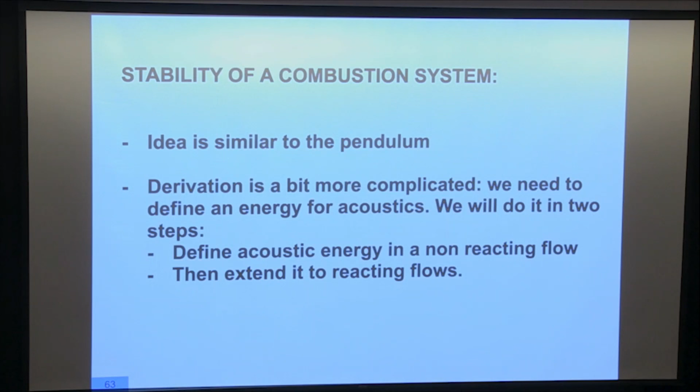If you push a swing, you know that — you have to push when velocity is positive. Now, same thing for a flame, except it's a little bit more complicated, but you should find your way. This thing we've done already, so you know about acoustic waves. I'm going to jump right away to the derivation for the flame, and it's this one.

A few minutes ago, we derived equations for acoustics in an isentropic flow. If the flow is not isentropic, if you have a flame, entropy is not conserved, so you have to do the same thing I did before, but now you have to add the temperature equation. You should know it by heart — this is the equation of Moshe also.

You take these equations and linearize them, exactly like I did a few minutes ago. You say density is constant plus a perturbation, pressure is constant plus a perturbation, temperature and velocity similarly, with mean velocity zero. You plug that into the equations and find the ones we had before for continuity and momentum, except now you also have the temperature equation. The temperature equation has been linearized here, and we can combine all of them to obtain a new equation for the energy.

And you see that you recover the equation that we had an hour ago. So this is the acoustic energy, this is the flux of energy. And look here, there is a new term, P prime multiplied by omega prime T, which is the unsteady heat release, normalized by some constant.

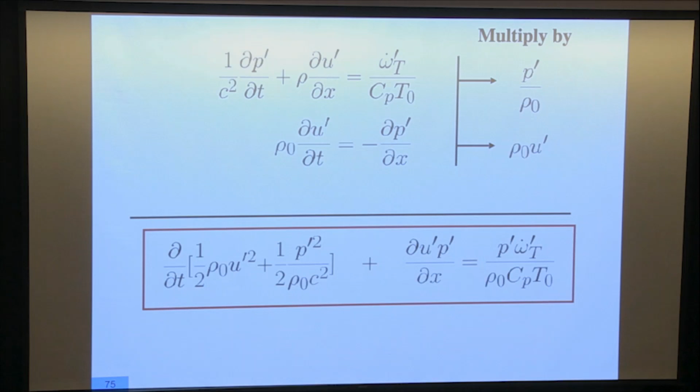Now this equation is the acoustic energy in a combustion chamber. And it tells you that the acoustic energy will do nothing funny if this term is not doing anything funny. In other words, if this term is not positive, you're good. If this term is positive, you're in trouble, potentially. And that's something we call the criterion of instability, exactly like the pendulum, except now it's for combustion.

And you see that now you go to this famous thing, probably the only thing you will remember from combustion stability theory: if omega prime and P prime are in phase, or let's say if their integral over time and space is positive, then you can have combustion instability. And that's the main criterion for instability. If you release heat when the pressure is positive, exactly like when you push the pendulum when the velocity is positive, you're doing something stupid, okay?

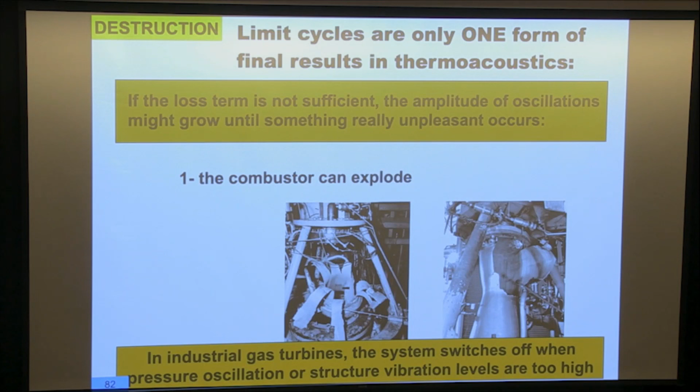In industrial gas turbines, you get accelerometers everywhere, and if they detect that the vibration is high, they just cut the gas. Okay? Don't want to break it. And they call Siemens, and Siemens has to pay for all the time that the machine is not operating, so they don't like that. Now, there are other solutions.

The flame can also quench by itself because it's moving so much that at some point, whoop, it goes away. Same result, you have to stop the machine. The flame can go to another place. That's bad, it can move and stabilize at another place and burn everything there. That's also the end of the combustor.

How do we know all that? Well, actually, because on this system we are able to do active control. I'm not sure I have time to start that now, no, I think I'm going to do that tomorrow. Just want to flash the principle of active control, which is a little bit crazy, but when we did that, it was a crazy idea.

You've seen here that we have this loop which creates combustion instabilities. So some people say, okay, there's a loop, let's add another one which will play a role opposite to this one. And that's the principle of active control: to add another control loop on top of this loop. How do you do that? For example, you measure the instability in your system with a microphone, and from that, you pulsate the injection of fuel with the right phase so that you can actually counteract the natural instability.

So you add a feedback loop on the initial loop, and if you're good enough, you can actually kill the instabilities. That was developed actually in '85 or '84, I think Cambridge did it first, we did it a year later, and it works extremely well. That's what I will show you tomorrow. You can actually completely inhibit these instabilities by adding a control system on top of it, and that will allow us to do other things I will describe tomorrow. So I will stop here. Any questions?